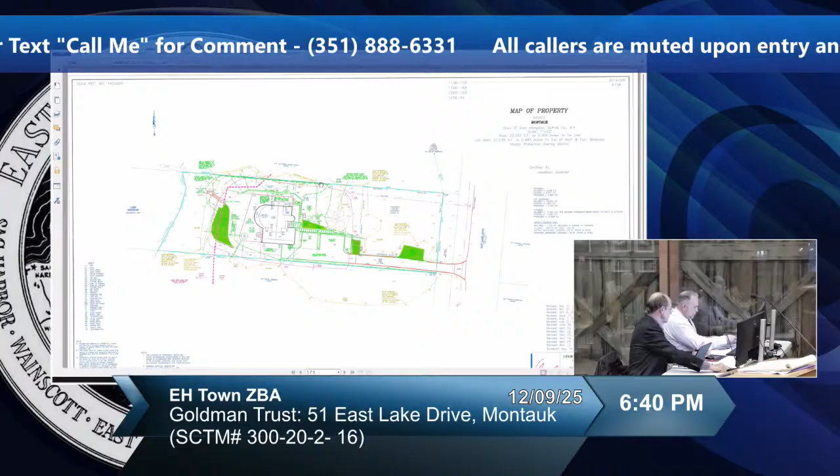Before I get started, I'd like to point out one significant change made by the applicant. The 309 square foot deck addition on the Lake Montauk side of the house has been eliminated. That eliminates the need for a 26.6 foot bluff crest setback variance, as well as the 68.7 foot wetland setback variance. So, in consultation with the client, after reviewing the analysis memorandum, that has been eliminated from the application, significantly reducing the relief being requested.

Yesterday, Due East also submitted a drawing that compares the layouts of the existing driveway with the proposed driveway and the driveway that was approved in 2016. I believe you have that available—this way there's no confusion on what was and wasn't approved. It's a nice visual, makes it a little easier.

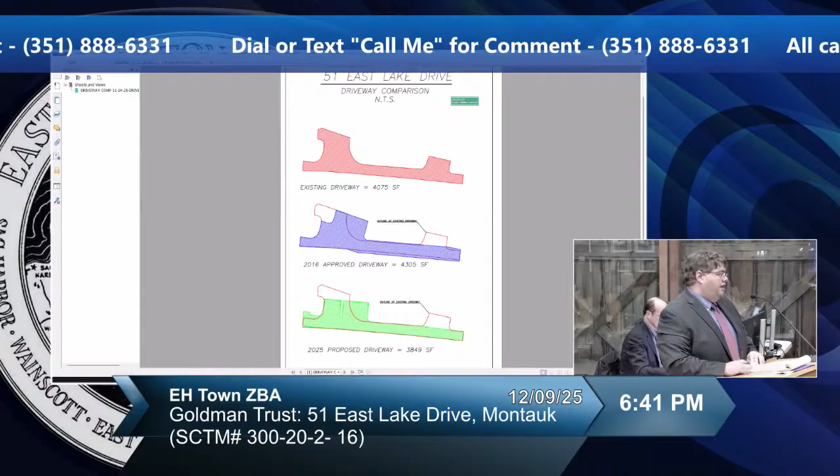Also, a drainage plan was submitted yesterday by Due East, which provides dry wells that will capture the runoff from the shed, the carport, and the existing driveway. So it eliminates any runoff concerns for these proposed structures and the proposed reconfiguration of the driveway.

The property is bounded by Lake Montauk to the west, East Lake Drive to the east. The eastern portion, as you saw, contains significant freshwater wetlands that run along the northern property line. In addition, a small wetland had developed over the leaching pools from when that was upgraded in 2016.

First, we'll address the bamboo. We recently reevaluated the square footage, and it's closer to 3,000 square feet than 2,000 square feet of the stand of bamboo. This is going to be removed and revegetated in that area along the property line.

To be clear, this bamboo removal is only on our property. I know there was mention in the TAM that the neighboring parcel was also looking, but this is only for our property. Access for the bamboo will be taken along the south and west sides of the house in the area of the existing lawn on the Lake Montauk side, so there wouldn't be any disturbance for the equipment to get around there to remove that bamboo.

The existing bamboo does not support native habitat and does not provide any environmental benefit. With me tonight is Dr. William Bowman of Land Use, who can address the benefits from the bamboo removal and answer any questions that you may have in that regard.

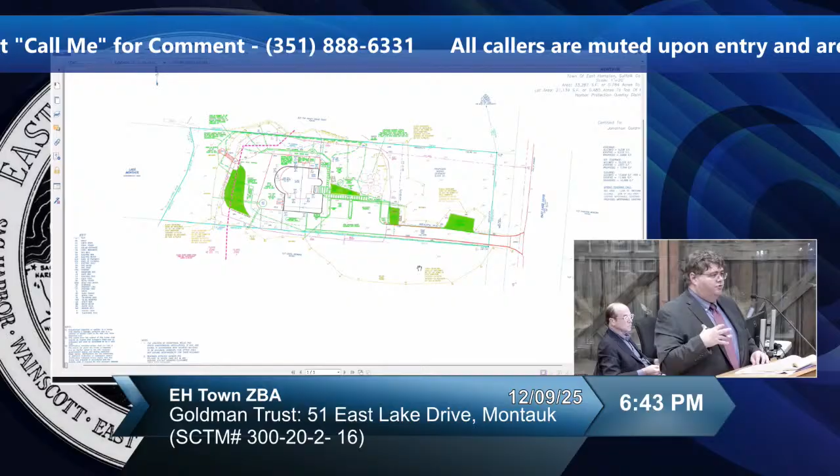Good evening, ladies and gentlemen of the board. William Bowman, Principal, Land Use Ecological Services. Can I swear you in? Sure. You swear to tell the truth, the whole truth, and nothing but the truth? Yes, sir.

Land Use Ecological Services, 570 Expressway Drive South, Medford, New York. As David indicated, the application will involve managing about 3,000 square feet of bamboo along the northern property line.

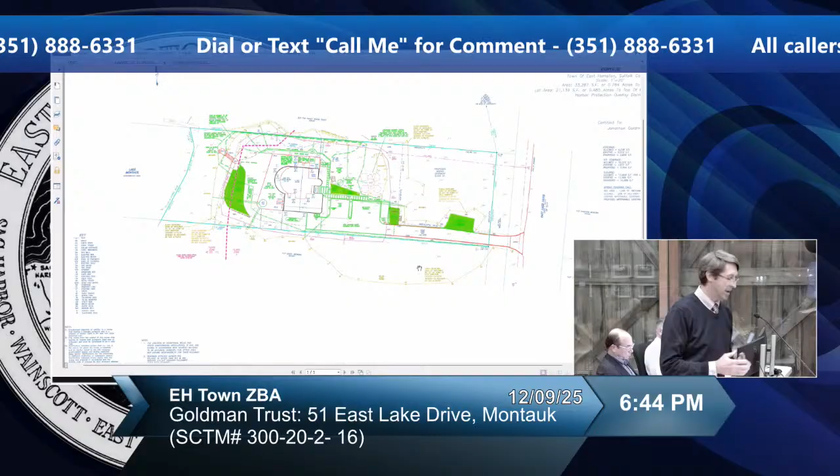This bamboo management will provide ecological benefits by establishing native vegetation that will provide better wildlife habitat and food resources, and converting that rather out of place bamboo stand to a habitat more typical of the dense shrublands found in Montauk. Bamboo management can be a chore, but the upside of switching that 3,000 square feet to native vegetation is well worth it.

Bamboo grows remarkably fast, forms those dense stands and a really dense root network that outcompetes and excludes native vegetation. The successful management of bamboo at this site will require removal of that extensive rhizome mass, and then follow-up maintenance for several years to control any new bamboo shoots.

The first step in that bamboo management would be cutting all the shoots to ground level with a motorized pruning saw or hand tools. The rhizome network would then need to be excavated out to a depth of about 24 inches and replaced with clean sandy soils.

To be consistent with the surrounding wetlands and overall project site, the restoration area will be graded so that the post-project elevations don't exceed the existing, and that the site provides a gradual slope from east to west to allow drainage towards Lake Montauk.

As David noted, the existing bamboo stand does cross the property boundaries and is present both on the property to the north and the subject property. Accordingly, given that the bamboo is not being controlled on the property to the north, a root barrier about 150 feet in length will need to be installed on or close to that northern property boundary to minimize potential for the bamboo rhizomes from the neighboring property running onto this restored site.

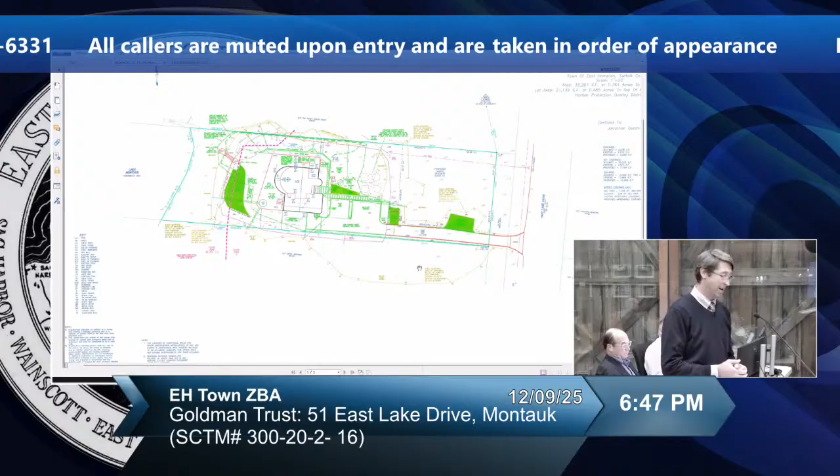Then, subsequent to that maintenance through that first spring shoot growth period, native plantings would be installed in that 3,000 square feet. A plant schedule was originally submitted with this application, but we'd expect it to be changed.

We would want the native plants to be installed to emphasize native shrubs. As I said, the bamboo area would then be replanted in mid-May to early June.

Of course, all the sediments and rhizomes that are removed would have to be taken off site. As David mentioned, they'd be loaded around the front of the house, brought to the existing driveway, dumped directly into a roll-off container, and then transported to a licensed disposal facility. There would be no temporary stockpiling of the material on any soil surfaces, and certainly no reuse of the materials on site or off site.

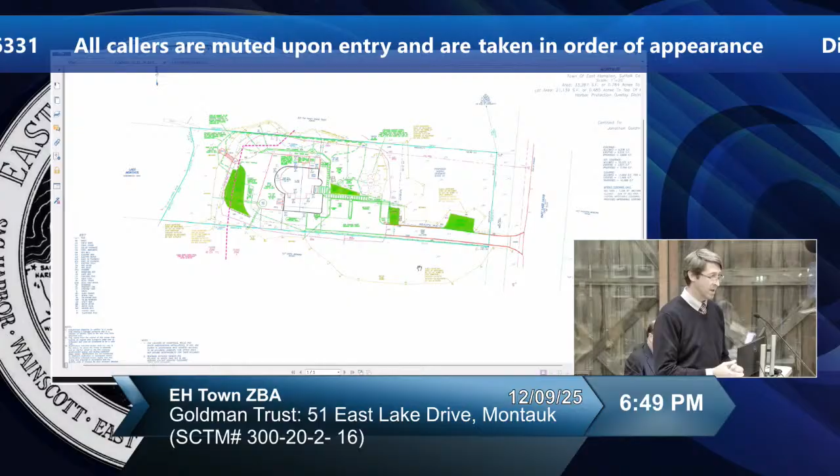Due to the excavation, the work area—the restoration area—would be surrounded by a heavy-duty silt fence. That's a silt fence with the kind of heavy wire mesh backing to prevent any erosion and transport of sediments towards Lake Montauk.

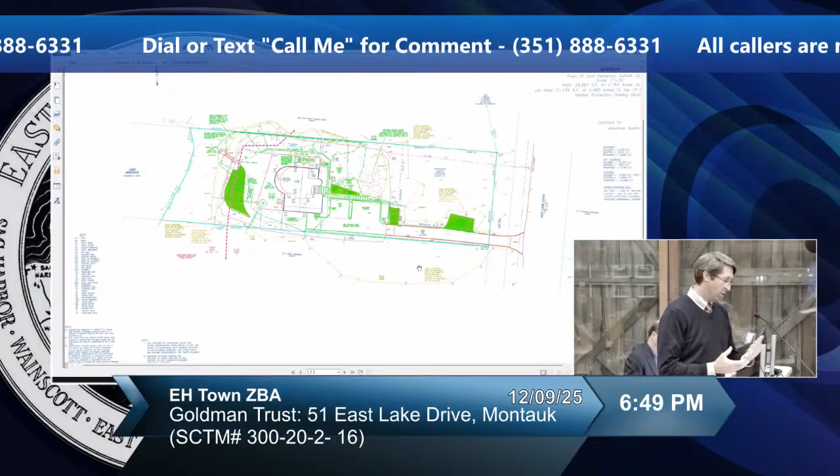Due to the aggressive nature and persistence of bamboo, long-term maintenance of the site would be expected for several years. In the protocol, we anticipated that would be necessary to ensure successful eradication and establishment of native vegetation. That maintenance would involve maintaining the restoration area twice a week during the spring growing period to look for new shoots and remove them if seen.

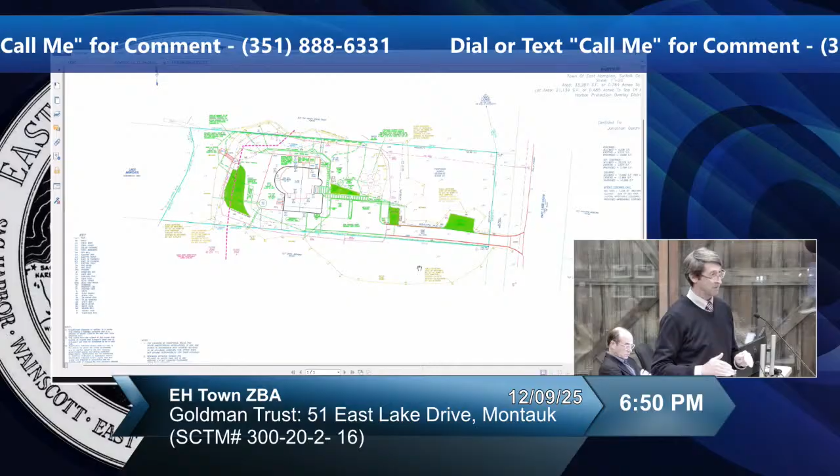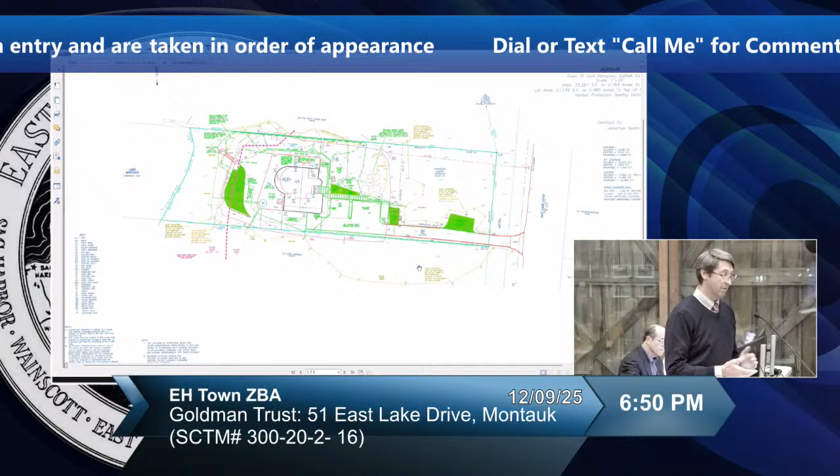Also inspecting and maintaining the root barrier. Rhizomes from the neighboring site to the north could try to grow over top of the root barrier, and you'd have to cut them off at that point. With successful maintenance, 3,000 square feet of additional native vegetation could be established. That vegetation is adjacent to the wetlands and the bluff, and would provide significant habitat improvement.

So with that, if the board has any specific questions about the removal methodology for the bamboo. I don't have any questions. Thank you.

As part of this project, our client is also proposing a septic system upgrade. The existing septic tank would be removed and replaced with an IA system, an IA tank. The pump station, which my understanding is failing or failed, will also be replaced. The leaching pools will not be replaced - they are existing, and we don't need to disturb or remove them in order to install the tank or pump system. So that little wetland that has formed over that will not need to be disturbed. Those leaching pools will not be removed.

Moving next to the cabana on the north side of the house, where there's currently a shower, bathroom, and storage area, that structure will be rebuilt in kind, in place. The exterior dimensions will not change. The interior layout will be modified slightly so there'll be a little more storage, and the shower will be moved to the outside eastern wall of the structure - an open air shower instead of being enclosed inside. So there'll be no footprint change, no additional square footage or floor area, decking or anything like that. It's in-place reconstruction.

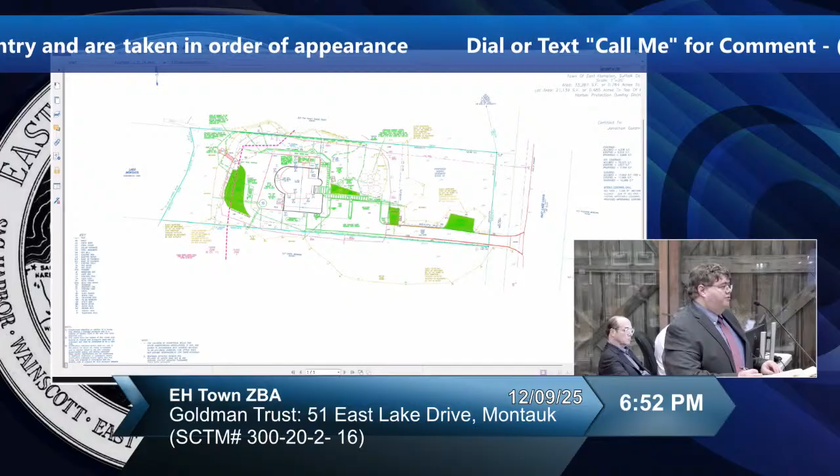In addition to the bamboo removal and revegetation, as further mitigation our client is proposing a scenic easement over the eastern 100 feet of the property, absent the driveway. So there would be an 8,440 square foot scenic easement proposed over the eastern portion of the property.

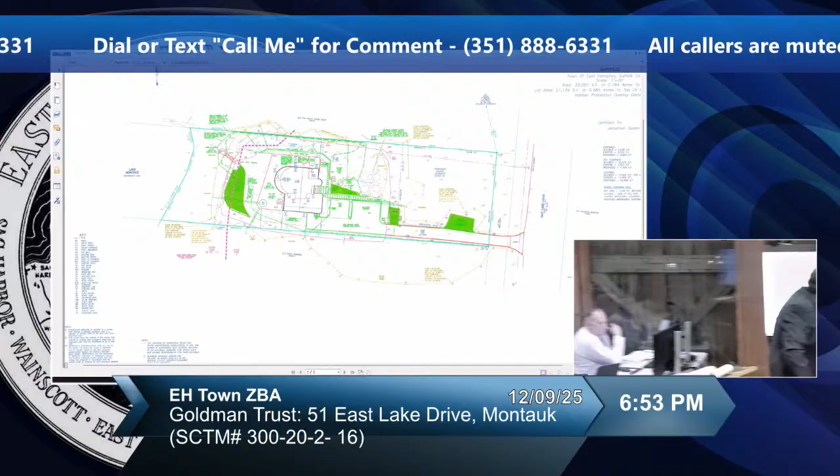To effectuate that, the parking area noted on the right-hand side as you first walk in is going to be relocated up closer to the house. It's currently approximately 2 feet from the wetlands. It will now be approximately 6.5 feet from the wetlands, 20 feet from the new pocket wetlands, and 25 feet from the larger eastern wetland. This provides additional continuity for the scenic easement and for the wetlands and native vegetation. This area will all be removed so the scenic easement covers that whole square, and this area will be replanted with native vegetation contiguous to the wetlands.

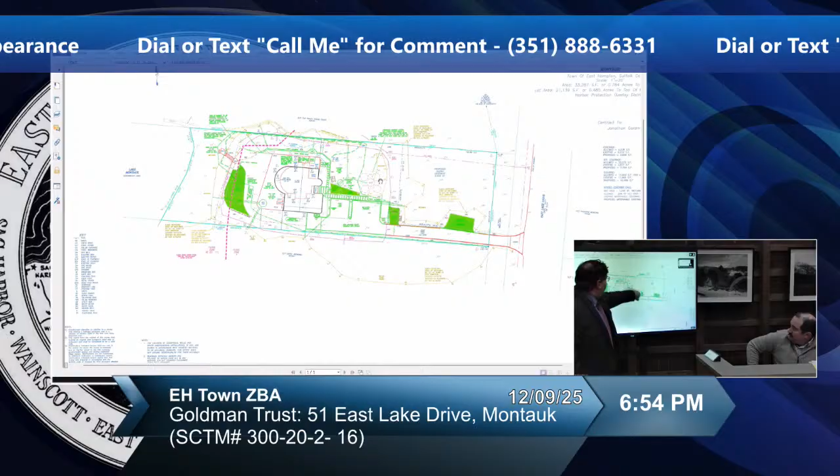Where's the pocket wetland on there? It's right here, out here. Yeah, it formed over top of the leaching pools from when they were installed a few years ago, I believe 2020, in that area.

So we have that chart that shows the three driveway configurations. If we could pull that up, we'd appreciate it. Thank you. The current proposal reduces the driveway by 226 square feet when compared to what was approved in 2016, that driveway was 456 square feet larger than what we're proposing now. So we're less than what's there and less than what was previously approved in 2016.

We understand that small wetland was not present at the time of the 2016 approval. However, at that time the board approved coverage of 7,891 square feet, building coverage of 2,312 square feet, and clearing of 15,498 square feet.

As part of the current application, the proposal includes 127 square feet less in total coverage and 4,960 square feet less clearing, in addition to providing a substantial scenic easement that was not part of the 2016 approval. Through revegetation of multiple areas on the property, overall clearing will be reduced by 676 square feet.

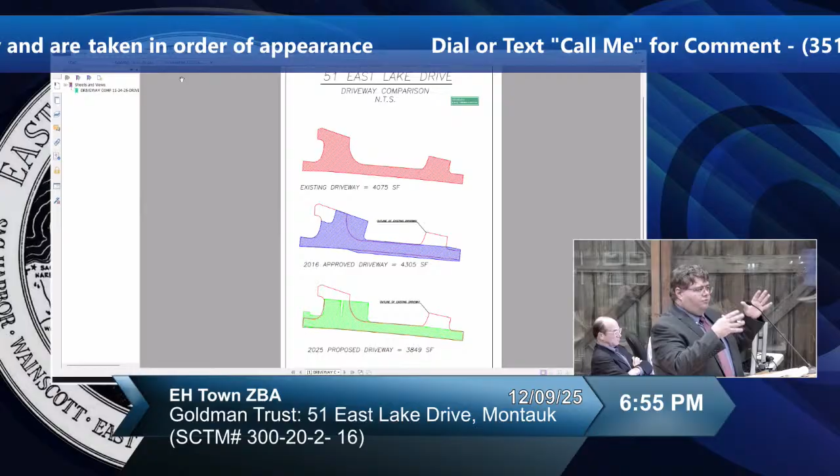In addition to the parking area being revegetated, the area where the pop-up shed and carport were will be revegetated. Approximately 800 square feet along the top of the bluff will also be revegetated from lawn to native vegetation. There will be significant revegetation at the property, in addition to the 3,000 square feet where bamboo will be removed and revegetated. We feel this benefit to the property, the environment, and the neighboring wetlands is a significant mitigation for the request we're making today.

Can you clarify the total lot coverage? You're saying it's decreasing? Because the survey is saying it's increasing.

Which survey are you looking at, Ron? Total lot coverage, am I looking at the right survey? I believe this is just showing it decreasing slightly. Oh, maybe, okay, so maybe I'll pull that up. I might be looking at the wrong one, David, so let me pull that up. All right, thank you. Which one? October 31, 10/31/25. Okay, yes.

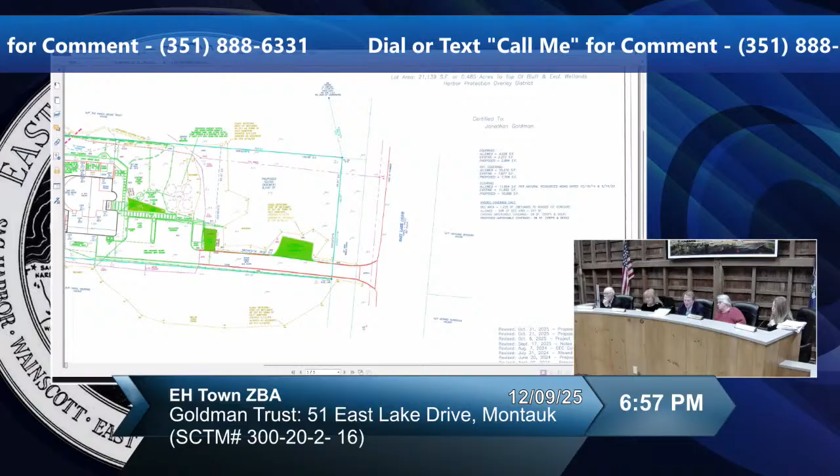The building coverage is increasing, total coverage is decreasing, and clearing is decreasing. But that doesn't include the 300 some-odd square feet of deck being removed from the application, right? So that's not reflected.

No, this application does not include that deck. There's no deck on this survey. So that's already been removed from that number. That decision was made since the analysis memorandum came out and the application was resubmitted.

Is there any other questions at the moment? Are you finished? No. Oh, good. No, I'll wait till you're done. Sorry. That's quite all right.

As we just mentioned, the carport and shed increase the building coverage by 672 square feet from what's existing, and 572 square feet from what was approved in 2016. However, any runoff from these structures will be captured by dry wells located in the driveway and adjacent to it, outside of the scenic easement, so no detriment will come from runoff.

The carport is open on 3 sides and will be built over the existing pervious driveway. There will be a new, I believe quartz, but still pervious driveway underneath it. It's mounted on sonotubes, so there's no foundation under it per se — it's essentially just being built over the pervious driveway.

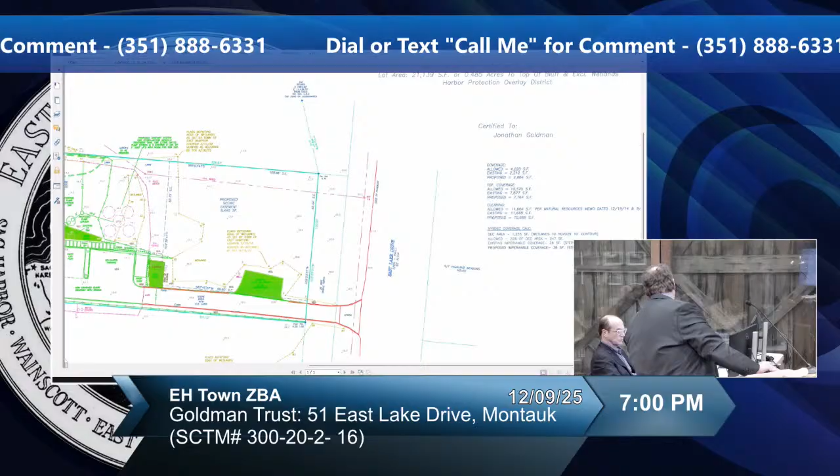This is the shed right here. Typically it would only go down 3 feet. The plans submitted do show it on footings, but we can do that on sonotubes as well to minimize the disturbance. I think that would be more appropriate.

That way we could eliminate the need for disturbance from any footings. We'd be happy to make that change and submit drawings as necessary. What's the total capacity of the dry wells you're talking about?

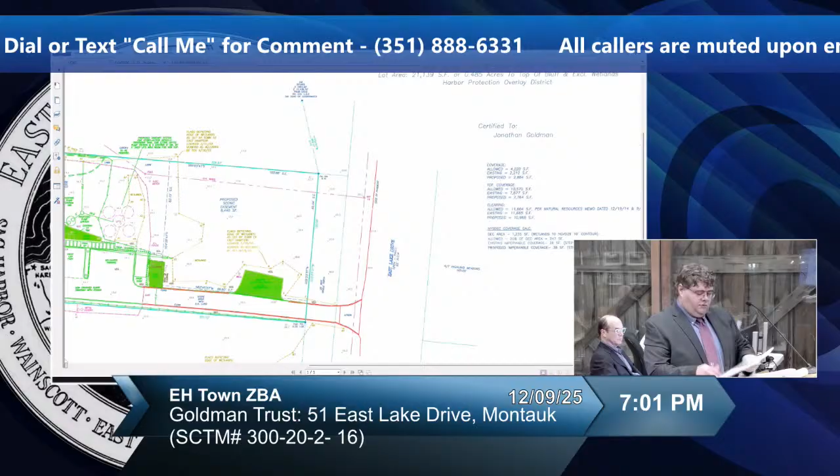Sure, David, I believe they have it already. It's a 2-inch rainfall event. This is the engineer's design. Thank you, yes, it says it's a 2-inch rainfall event. Thanks, Shannon, I'll look up this.

I got it, right here. There's six dry wells, and each one has a 42.24 cubic foot capacity. The engineer's not here with us this evening, but that was designed to capture not only the runoff from the carport and the shed, but the entire length of the driveway and the parking area by the house. So if you can see in that picture, I believe there are 4 drains down the northern side of the driveway as it comes in, and they're all linked together into these 6 dry wells.

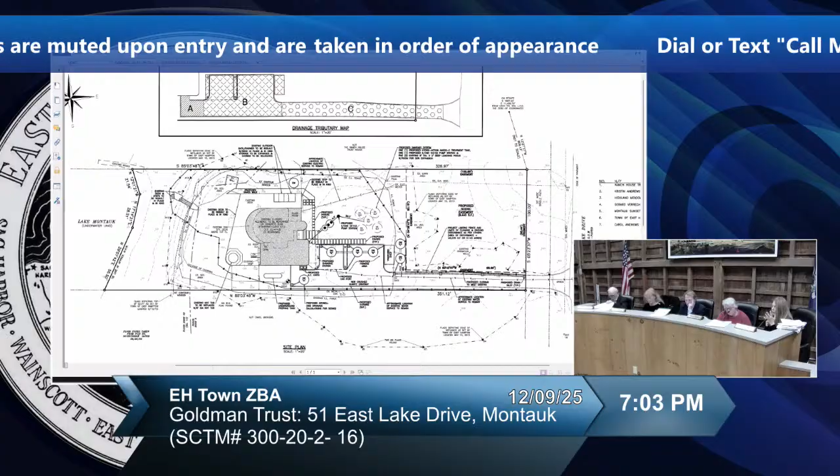So it's a small structure, but I think I'm looking at the right site on the survey—given that it is a small structure, was there another way to optimize the position between its utility and getting it further from the wetlands? Well, part of the issue is the driveway's 150 feet long to the parking area, so we do need area there to turn around as well as have a car or two parked at that time. So that's why the shed is brought right up to the side of that parking area. Anywhere north of that, you have the additional wetland and the sanitary system. So that really provides, we felt, the maximum convenience and utility for our client, while also not putting it any closer to the wetland. Unfortunately, there's wetlands north, south, east, and west.

I'm sure that you stared at it all very closely. Any other questions here? No, I'm almost done.

So I'll just run through a quick little summary here then. So the benefit we're providing here as part of this application: decreasing the total coverage by 113 square feet, proposing an 8,400 square foot scenic easement, relocating the parking area that's 2 feet from the wetlands and revegetating that area to provide continuity for the native vegetation and wetlands, revegetation along the bluff crest, removing and revegetating the 3,000 square feet of bamboo, decreasing the overall clearing on the property by 676 square feet, and adding an upgrade to the septic system to an IA system, as well as providing dry wells for these proposed structures and for the driveway.

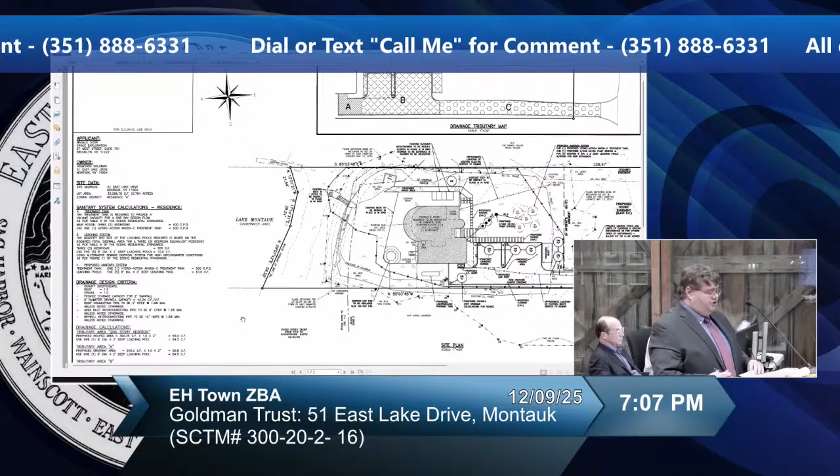The lot's constrained, that was noted in the 2016 approval as well. The proximity to the wetlands on and adjacent to the property—there's no way to avoid variances for any sort of structure on this property. The carport is over a pervious driveway already, an area that's been previously disturbed. The shed, as you asked, could easily be on sonotubes to reduce any sort of disturbance, and so is the carport on sonotubes. So it's a minimal disturbance, and any sort of runoff from these structures is captured by the dry wells.

We understand that variances can be considered self-created, but such self-creation is not dispositive. I think we've shown that these variances are minimum necessary to alleviate the difficulty for our client without impacting the surrounding wetlands. Again, there's no garage, there's no basement for storage. So we recognize the property is constrained, and I believe this application has done its best to fit the requirements of our client while also providing a net benefit to the wetlands in the neighborhood.

So I'm done if you have any questions for me. Questions? I have a couple. We'll hear from Brian as well, but I am curious, and I don't have the expertise on this, so that's why I'm asking.

So you've got an emerging wetland, or a newly sourced wetland, that is partially over leaching fields, and those will remain. I understand not wanting to disturb the new wetland, but can you address the impact? We'll hear from Brian, I'm sure, but I wanted to get your take on leaving leaching fields under wetlands. I don't know if that creates any potential issue. I'm not a scientist, I'm not sure.

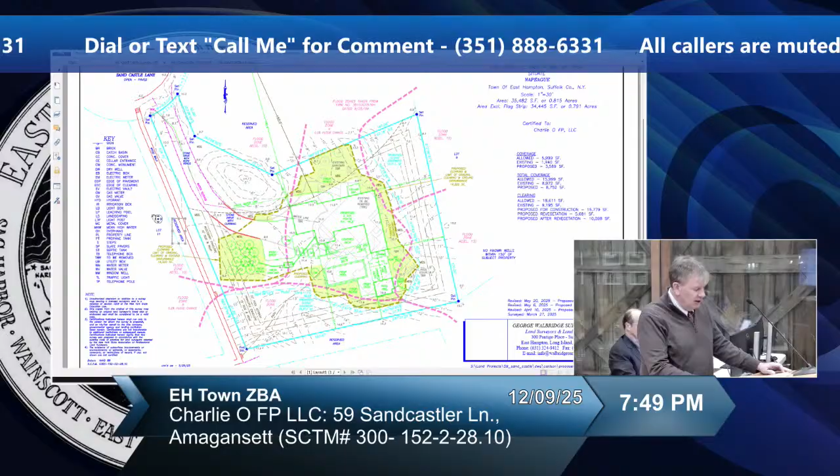They're the owners of the property at 59 Sandcastle Lane. We're seeking permits to redevelop the property with a new residence, pool house, decking, and other improvements depicted on the proposed plan and notice in tonight's hearing. I'm also here with Britton Bistrian and Sean Webb, the architect.

Just if you have questions I don't have—I can't complain about the prior hearing. I should never complain about people talking long at zoning board hearings, so I'm going to keep that in mind. We've been here a while, so I'm going to try and be quick and address a few points.

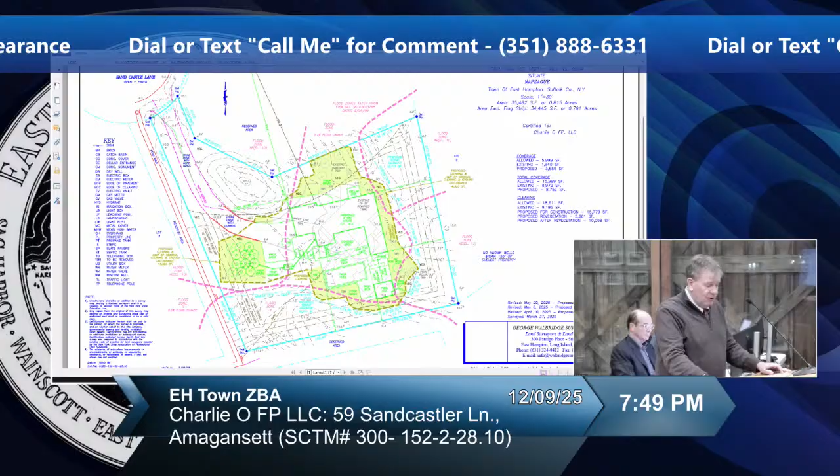The lot, as Member Meering pointed out, is part of the Dunes at Napeague subdivision, approved by the town in 1981. Most of these lots are similar in size, about an acre. I think it was a clustered subdivision, so some lots are smaller to allow for larger reserved areas. This house was built right after the subdivision was approved, probably around 1982.

It's a little different than some of the areas to the west in Beach Hampton, where you have these small non-conforming lots—a totally different area, basically. It just has its own character. You'll see the larger houses protruding out of the dune land, et cetera.

I wanted to recognize the only relief requested here is an NRSP associated with the beach vegetation. All of our proposed improvements meet wetland setbacks and all other zoning requirements and are proposed out of jurisdiction. I think Member Meering's photos show we really value the dunescape on this property. It's a really unique area—something you don't see anywhere else in the town. It's a lovely landscape, and we made great efforts to preserve and protect it with our planning.

The existing house predates the town's NRSP regulations, probably from 1982, and these regulations were adopted by the town right around 1984. As I recall, this might even have been one of the subdivisions that led the town to regulate dune vegetation at the time.

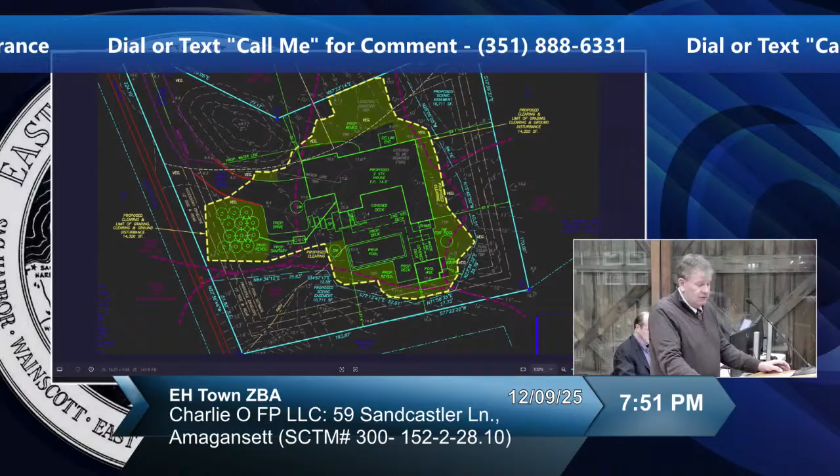My client did have the opportunity to seek to grandfather this application under the prior gross floor area limitations. We did have an active application at that time, but we really didn't have the interest in maximizing gross floor area on this residence. We thought the proposed design was consistent with the natural aspect, and we didn't want to overpower it with the structure. We made great efforts to fit all of our proposed redevelopment within the limits of clearing and disturbance of the existing house in accordance with the NRSP regulations.

And this is the graphic that Member Meering was referencing—just a colorized version where you can see the outline in red is the existing improvements, with that funky arc deck that'll make it stand out. The overlay in blue is what we're proposing to put over it, so it largely follows the existing footprint as much as we could.

Current sanitary design to code using an I/A system is a variable outside of our control. The sanitary system will expand in size as well as the area it occupies based on the shallow groundwater system we're using. We're proposing to revegetate all areas disturbed by construction using beach vegetation.

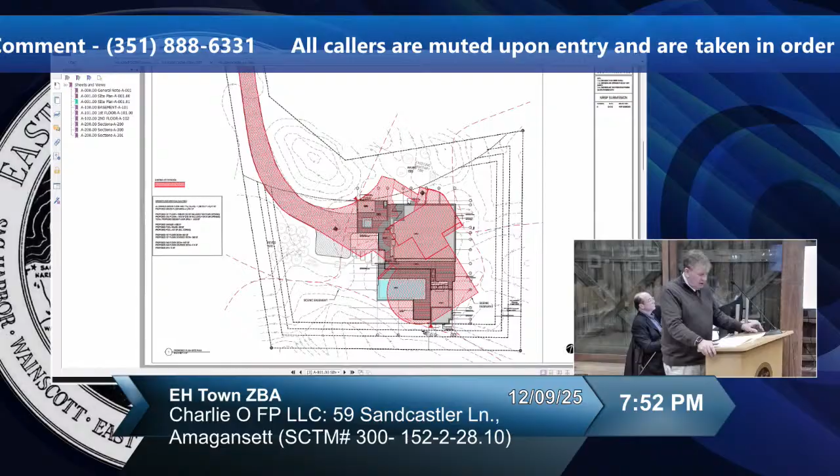I would agree to all the suggested mitigation the planning department has suggested, including the expansion of the scenic easement to the north and northeast of the existing driveway. That's certainly a lovely area that should be protected as part of the entrance to the property, and it's also visible from the areas off of the road frontage.

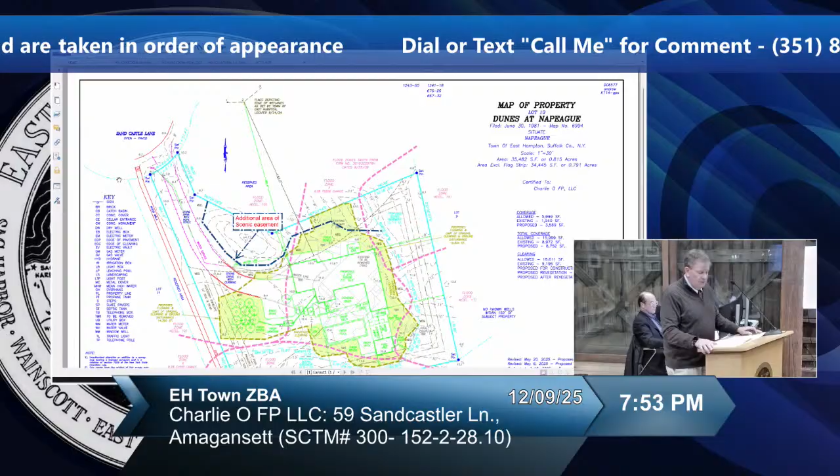I did want to discuss the sanitary system. Abandoning it in place is a very beneficial suggestion. Basically, the existing sanitary would be pumped out, cleaned out, and filled with clean sand and left to remain on site. Actual removal of the system, the rings, et cetera, would bring a lot of additional disturbance to the site. It's worth noting the existing system is located within the minimum required wetland setback, whereas the new sanitary system was proposed on the west side of the residence.

It's also proposed in a relatively flat area. You don't see the undulations in the topography there, and it was done to maximize its setback from the wetland. It complies with all setbacks. It's also a logical location adjacent to the building envelope that will not require further clearing outside of what we intend to be a closely followed edge of disturbance. It will also be an area that's easily serviceable if they have to come maintain the system, pump it out, et cetera. It's right next to the driveway.

I should also mention that the New York State DEC issued a letter of non-jurisdiction on the project. I have it here with me, but I think it's also in your files, and I can submit it if you need it. Other than that, I'm available to answer any questions you might have.

What's happening with the disturbed or excavated soils? The disturbed or excavated soils are largely clean sand, basically. What's happening during construction, what's the protocol? Because typically, this is delicate dunes—are we maintaining the soils on site for reuse? Where are you going to store them?

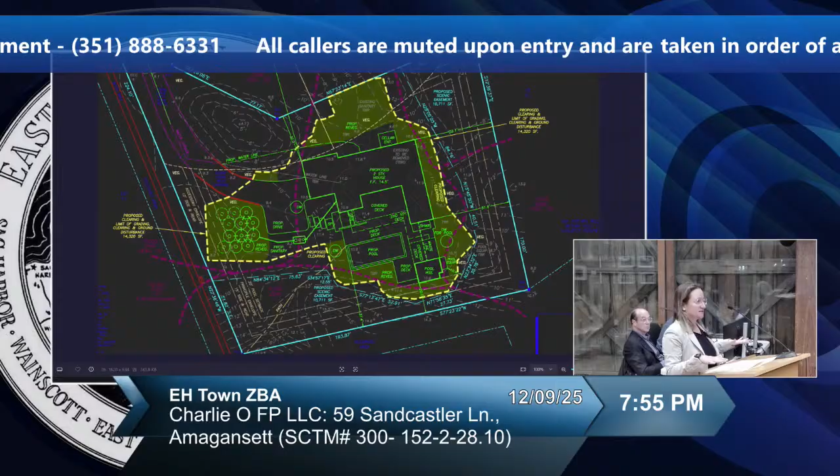In preliminary discussions with the contractor, we had discussed that because we are removing a house and a foundation, there will be areas that need to be filled in. As well, because the existing septic system is pretty extensive, reusing that sand on site—pumping and abandoning the septic—a lot of that sand can be used there. But the intent would be to keep it all on site.

We'd be happy to, as a condition of approval, do a cut and fill or construction protocol. So there are two concerns when dealing with properties like this: what happens to the soils and reuse of the existing soil so vegetation can grow back and be maintained, and also maintenance of the duneland character of the property when completed. We want to see those rolling topographies maintained, which I think you're doing.

So those are two major concerns we always have when doing such a pristine location like this, because it's one of the most pristine in the town. And it's definitely beneficial to the applicant and to the project as a whole to keep those soils on site.

Sand is expensive, I can speak from experience on that one. To use the soil that we have to backfill the new foundation, the new foundation is a little bit larger.

I think that would be good practice to do that. So however we want to memorialize that in any approval, we'd be happy with it, either as a construction protocol or all soils need to be stockpiled on site in a certain location. Maybe we could identify where that is. Probably make the most sense over the septic and do that last. But we'd be happy, I'm sure there's some logistical...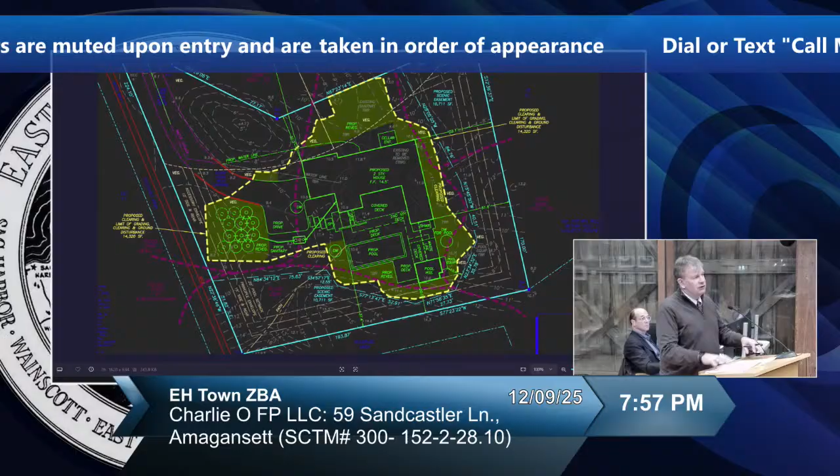Well, I believe what you're talking about are the top layers. Traditionally on projects like this, I've seen conditions that say excavated soils will be retained on site in a sediment controlled area for reuse on the site. And clearly we would use the top layers to create the undulating topography, and the lower levels would be more applicable for backfilling.

But I don't think we would object to stockpiling, maintaining them on site in a sediment controlled area. And if we do have to remove any of the soils at the conclusion of construction, we would come back to the board and explain that for the board's approval. But I don't think we're going to need to.

Looking at the cut and fill, just the aspect of the site, it's all clean sand, and our intention wasn't to. Yeah, and staging becomes an issue too, but maybe with what Britton says, you stage the septic at a later point or whatever. Yeah, the septic area, staging and sequencing is an issue.

So the TAM does question the scope of the 6,584 square feet of temporary clearing. And, you know, we've gone through this on other applications too. So can you address, I mean, do you have a 64% increase in GFA, the lot coverage, not total, but the lot coverage is, you know, going up, I think, 1,500 square feet.

It seemed, I guess, just address why 6,584 square feet of temporary clearing is obviously needed. Is there a way to, you know, take that down?

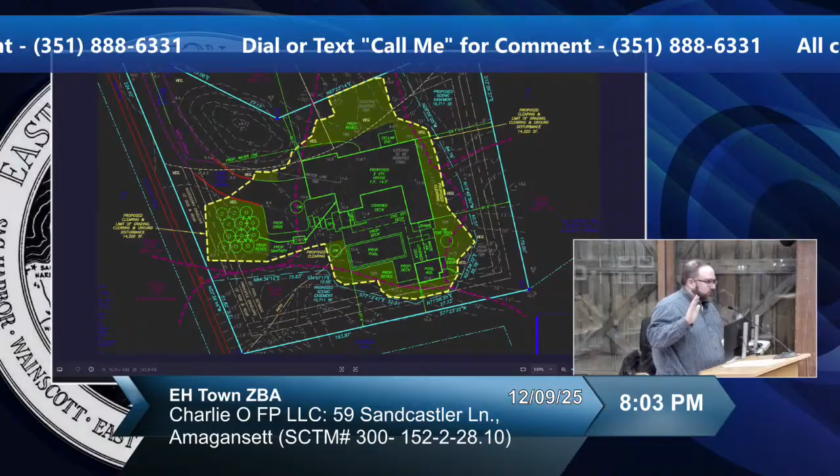I do. Thank you. So this parcel is located in the southern end of Sandcastle Lane in Amagansett. The project before the board is to demolish the existing residence, associated structures, and construct a new 3,910 square foot two-story residence with a 600 square foot attached garage, decking, porches, swimming pool, pool house, outdoor shower, and associated structures. The project requires a natural resources special permit for the clearing of beach vegetation, construction within dune land area, and minimal work within jurisdiction of freshwater wetlands to the north.

The dune land habitat in this area of Amagansett consists of maritime dune land and maritime heathland habitats as defined by the New York State Natural Heritage Program. The maritime heathland habitat is ranked by the Heritage Program as one of the least common in the state and has become less common throughout Long Island and the Mid-Atlantic region. This area is one of the few remaining areas of town that contains high-quality, pristine duneland vegetation.

The premises are improved with an existing residence, which is surrounded by pristine rolling duneland. The depressional wetland exists near the road right-of-way to the north of the property. A scenic easement is proposed in order to cover the majority of the significant duneland topography on the parcel as mitigation. This parcel has town-protected beach vegetation such as reindeer lichen, and state-protected pine barren sandwort, bearberry, and beach heather.

With such valuable existing vegetation across the undisturbed area of the parcel, the preservation of those areas should be paramount in any application on the property. The best way to maintain duneland characteristics and vegetation on parcels is to limit their clearing and disturbance from the beginning, rather than trying to reestablish it after construction is completed.

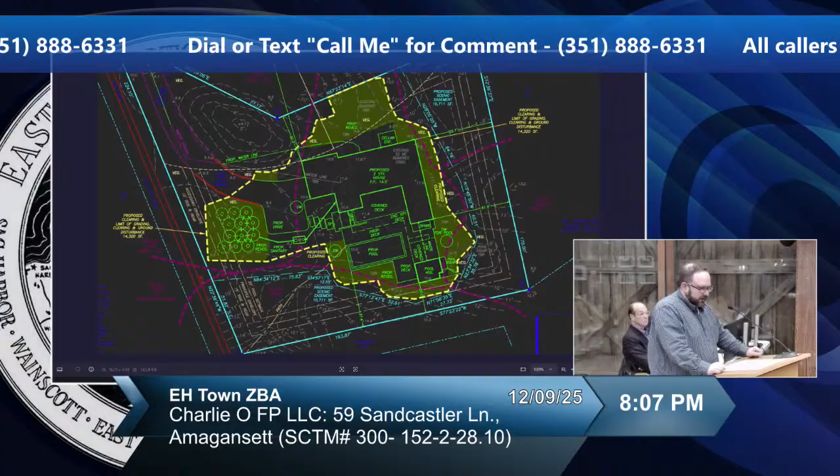Additionally, applicants are proposing to revegetate approximately 5,681 square feet of clearing for construction, including over the proposed sanitary system. An existing sanitary system should be removed, although that may not be required any longer. They discussed beach grass - I think that'd probably be fine in this case. I don't think anything more substantial is required. In this area, there's not a lot of woody vegetation other than like bearberry and things like that, but I don't think we normally would see that in a revegetation plan.

So I think at least kick-starting the vegetation in the area with beach grass and then letting the other vegetation sort of seed itself over time is probably a realistic option in this case, especially reutilizing those sandy soils, which have that seed bank in them, is important in that.

Aside from including more of the sensitive areas of the dune land in scenic easements, the proposed mitigation is in keeping with similar development in this area. While the proposed project is in the same approximate area of the parcel as the existing development, the quality of the surrounding dune land and vegetation cannot be understated. The board should be sure that the proposed improvements are appropriate and the project is designed in order to minimize unnecessary disturbance. Other than that, I can answer any questions that you might have.

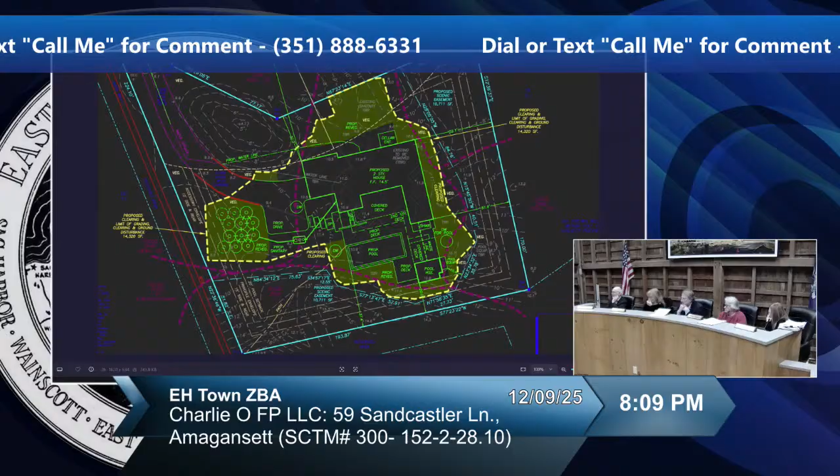Obviously, you understand what concerns we have, but in this diagram here, you have the yellow dotted line, I assume, is the clearing limits during construction, which I assume would be where the project limiting fence would be set. What about the driveway? I'm concerned about the dune feature to the east of the driveway, and I think we need to make sure construction limiting fence travels along that, because the biggest problem, as you know, is you can have construction creep on a project, and I want to limit construction creep. Certainly, that shouldn't be difficult to include in a new sketch or to include it in the determination.

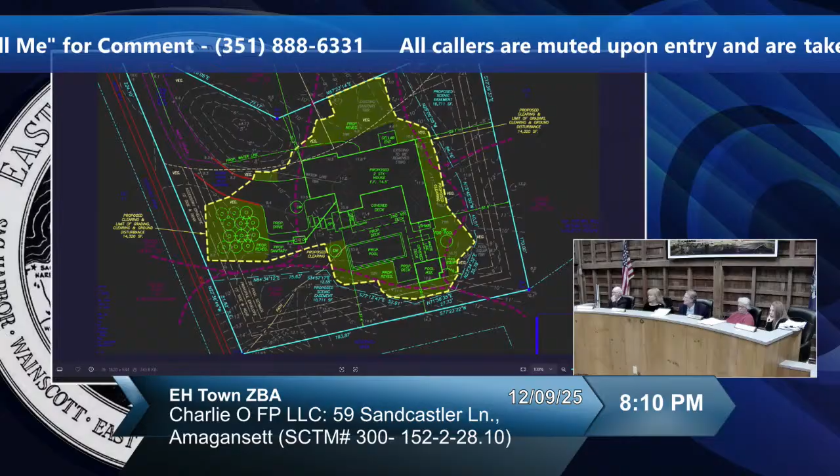Thank you. So number one, what is the square footage of the lot that will be covered by the scenic easement? I have no idea. It might say it. Did it say it? I didn't see the square footage. Is it that proposed 10,711 that they're noting on the survey? Yeah, plus an additional, I don't know, maybe 4,000 for the one that we had suggested. So maybe around 14,000, 15,000, something like that. The 4,000 is in addition to what's on the survey proposed. Right.

At 10,000? If what we had suggested was included on top of what they had come in with, you're saying there should be a somewhat bigger scenic easement. Correct. Let me bring up my sketch. And then why, if it's not in AE 10, is the elevation being raised as if it's in AE 10?

I think that's just the nature of the construction. If you look at the existing contours, they're at that elevation already. They're not raising it significantly, they're just building to match the existing contours.

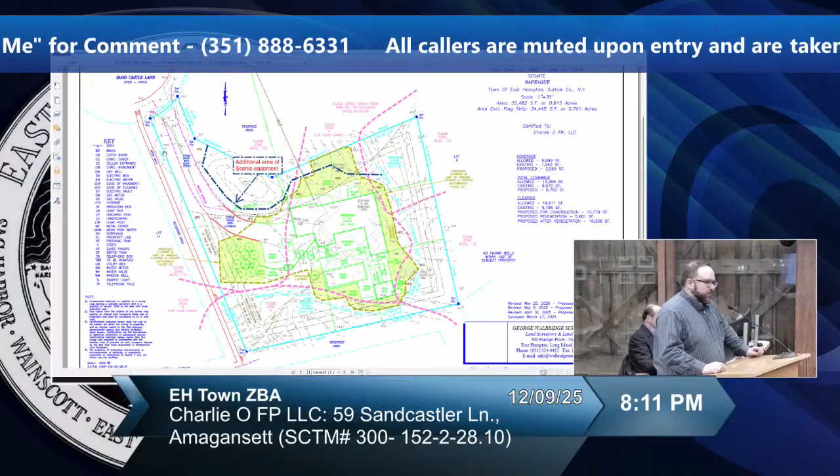In your paragraph about mitigation, you say as mitigation, extend the scenic easement, but then you talk about the re-veg of 5,681 square feet in the same breath as mitigation, but it's not mitigation because they're doing 6,584 square feet of temporary clearing, which would be expected. They're not asking to keep that clearing, they're asking to temporarily do it and then mitigate it by revegetating afterward.

Any other questions? I'm good, thank you. Thank you, Tyler. Is there anybody in the public that would like to address this application? Anybody online? You have zero callers. Thank you, Andy.

So I want to point out, one is the scenic easement. Yes, I think we can extend it up. That'll put it at about 15,000 square feet. That's, I don't know, 40% of the lot, but it's really quality versus quantity in some respects. The quality is the most important, the duneland aspects that you see and value the most are the ones we're really trying to protect.

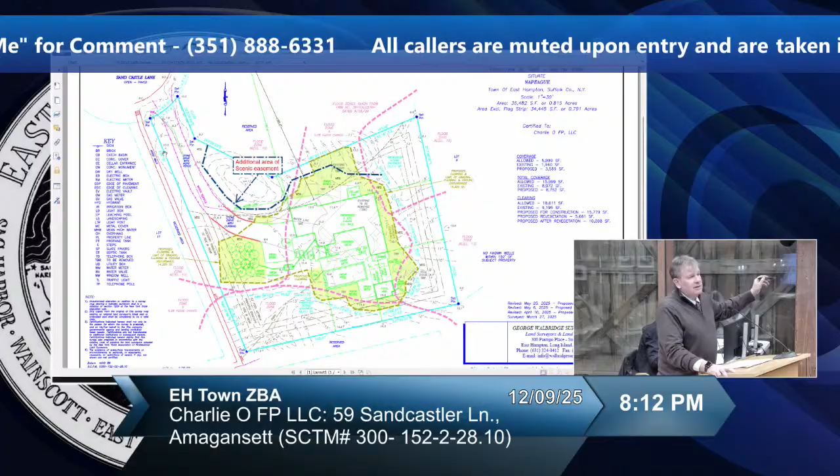In terms of the sanitary system, I think that temporary clearing will be reduced. We have to excavate enough to get the covers off to pump it out per health department regs, but that's certainly going to be much less temporary clearing. I don't know that we actually factored in what that difference would be, but it's probably 1,000 square feet, give or take, looking at the area we're talking about.

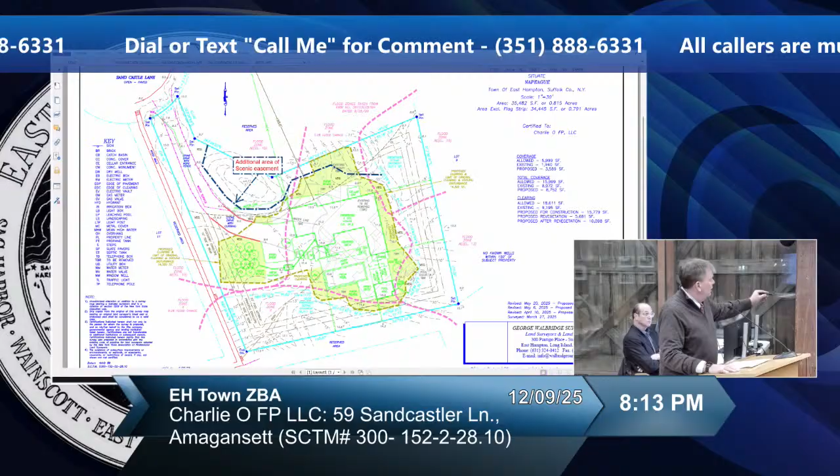In terms of the materials on site, we'd be happy to accept a condition that all material excavated shall be retained on site in a sediment-controlled barrier area. I think the area of the proposed sanitary system would be an ideal location to stockpile those materials while we're working. We can stage them there and work around them. There is a large area on site, it's not like we're super constrained in terms of where we can put these things.

Any other questions? I have none.

Andy, I just want to take a moment and say that you've been in front of me many times, and I want to take this opportunity to say I've enjoyed every one of them. Thank you, Your Honor. I've learned a lot from you. I've learned you're really good at naming wetlands. I've learned also that you're like George Washington, everybody in Montauk can say Andy slept here, Andy Hammer slept here. Thank you. Well, thank you very much for your service, it's been a pleasure.

Best of luck. So are we leaving the record open for anything? Are we getting a construction protocol? I think we can condition that. Number one, I'm concerned about the construction limiting fence, that's going to be dealt with I'm sure, and then maybe we can condition it on soils.

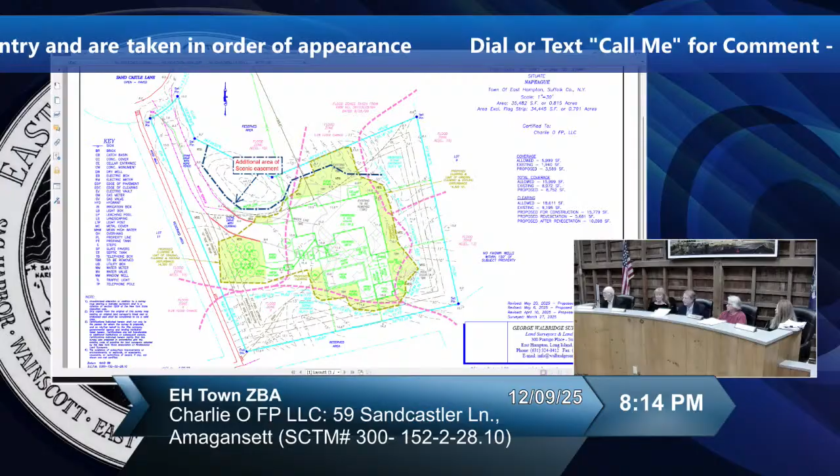I think that's the only open item, the soils remaining on site. I think we can do that in a sediment-controlled environment, the staging area. Yeah, and ultimately, not to leave the record open, but a condition of approval for a survey with the expanded clearing and the expanded easement. I think the planning department generally would do that on the sketch they submit.

So we're not leaving anything open, Mr. Chair? I don't think we need to. I don't think we need to either, I think we can condition it.

Thank you. Okay, thank you very much. Thank you, Britton. You ready for a motion? Yes.

Okay. In the matter of Charlie OFP LLC, 59 Sandcastle Lane, Amagansett, tax map 300-152-02-28.10, I make a motion to close the hearing and the public record.

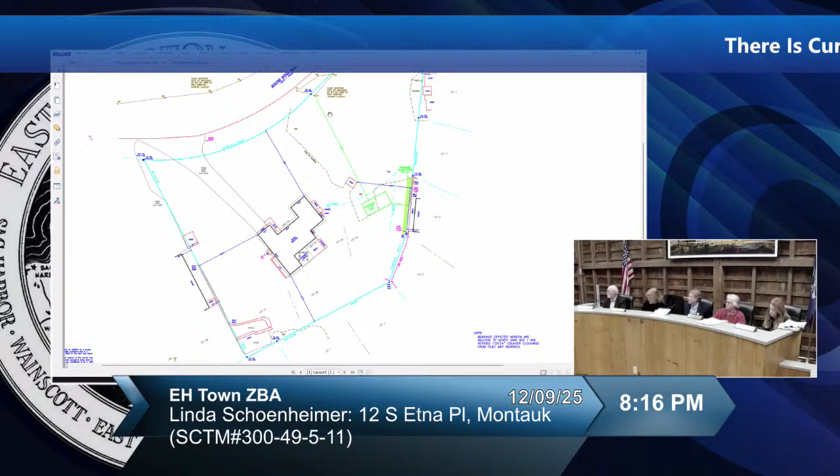So this is a small shed located 105 feet from wetlands up here to the north. There's also wetlands surrounding the property, and there's wetlands over here to the southwest.

A small amount of clearing is required, but that's privet, so we're not really too concerned with the clearing. They're doing a little bit of revegetation along the property line as well. It meets all the required setbacks. It's a very minimal project, and we don't really have any concern.

I don't have a problem with it. I'm good with this. Me too. I'm good. We have a motion.

Motion here. So for the application for Linda Schoenheimer, 12 South Etna Place, Montauk, tax map 300-49-5-11, make a motion to approve the application to be processed administratively.

Second. I concur. Concur. Concur. Thank you.

Next, we have post-hearing decisions. We have Montauk 007-668 LLC at 33 North Surfside Avenue in Montauk, Suffolk, tax map number 300-29-1-19.2.

Size and location is 19,105 square feet at 33 North Surfside Avenue, Surfside Estates, map part of lots 8, 9, 11, 12, and 13, block 356, map number 1690 in Montauk. Description is to legalize an existing home entrance, walkway, and driveway, install a new egress basement window, and allow for replacement of a new storage shed on a lot containing freshwater wetlands.

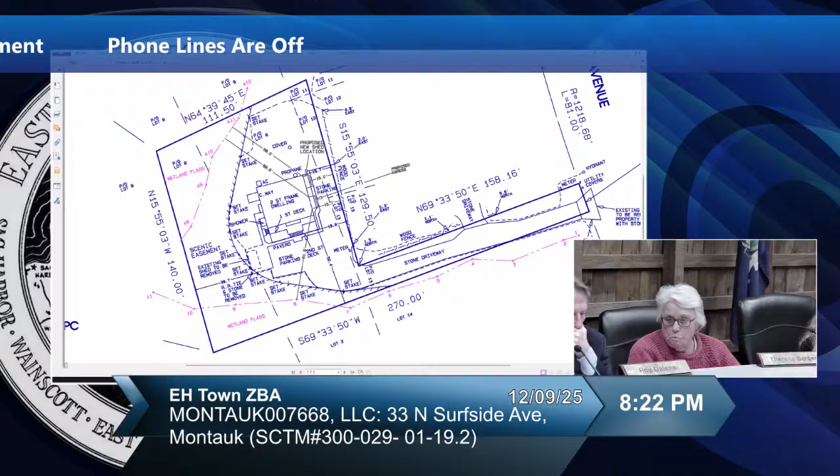Rick Whalen in his discussion did say that the apron, rather, they would remove it if we wanted them to, but he felt it probably protects some of the runoff from the gravel driveway to begin with. So I'm all in favor of giving the NRSP for that portion of the patio.

I think it meets the standards. I think there's no negative impact overall in the location of any of the improvements that are being required. And I think the minimum variances are being met on this and improve this project as a whole. Thank you, dimensional and NRSP standards.

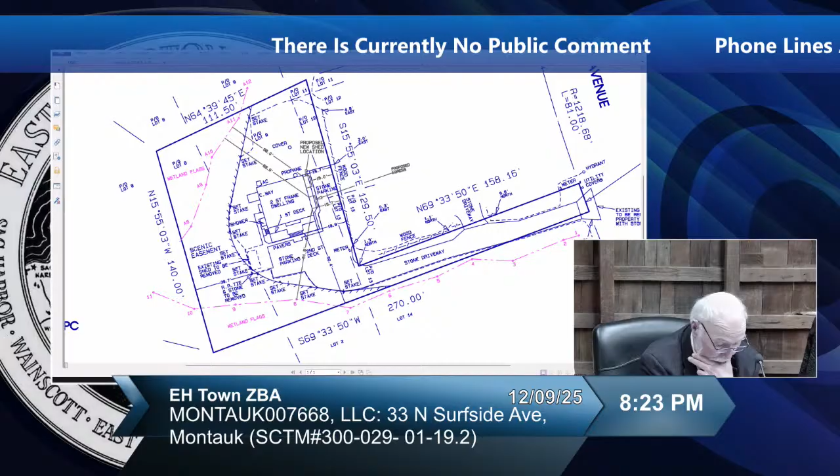Thank you, Ed. Yeah, there's not a lot to add. I think you're right about it. The egress window has a function there, and I think it was put in the best possible location. I think it's something that was reasonable for the applicant to ask for. I think we're moving a shed that's replacing a larger shed with a smaller shed up against the house, so it's in a previously disturbed area. We're going to revegetate where that shed was.

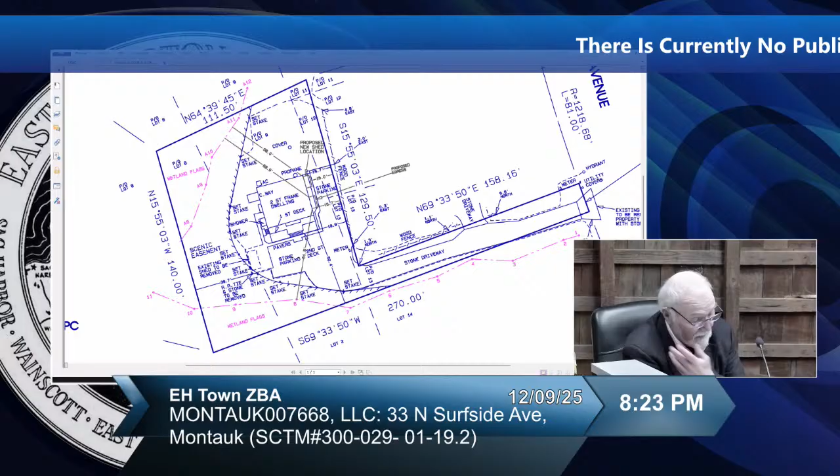I think that's a positive. I think the discussion of the apron, about a third of it was on the property of this parcel in question. I think taking it out has really no significant, but positive environmental significance. What's beyond it would have remained anyway - it was off the property. I think leaving it there is not in any way a problem for me. I think it does rise to the level of approving the NRSP. I think the variances are ones that are reasonable given what we were asked to approve. There's not a lot to add. I thought the presentation was a good one, and I think they tried to cover the bases. So I'm going to approve this application in its entirety.

Jane? Yes, I don't have a lot to add either. I'm approving the window egress variance. I think a window egress is appropriate and required for a finished basement.

It's balanced distance from both wetlands and likely the minimum variance necessary. And in no way do I see that an egress could be accomplished without a variance, and I don't see it creating any detriment to the neighbors or environmental conditions. I'm approving the shed for similar reasons - likely the best position possible. It's smaller than what was there, and it's out of the scenic easement.

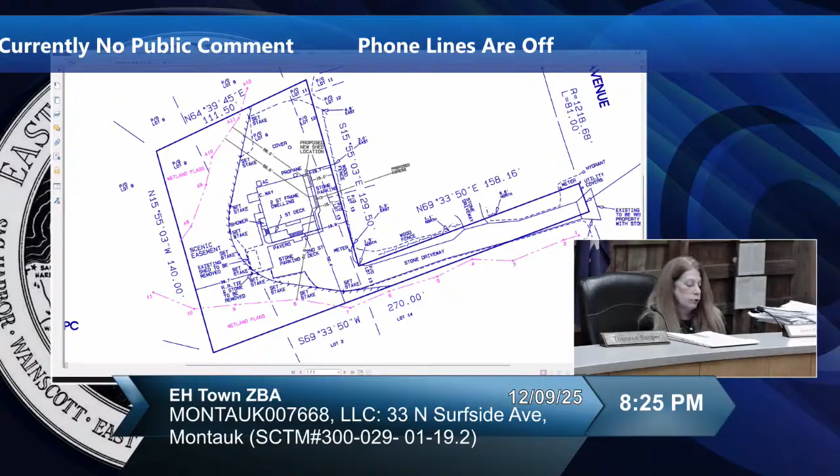There in the record, there was a BP memo sketch from the building department that also talks about us having to legalize everything that was in pink, which were all the walkways and everything. I guess we're legalizing that under the NRSP since they don't require variances. And I also agree that stuff does not create a detriment to the protected natural resources or anything else. On the apron, I don't know how they get the part of it outside of us approved. I guess they have to go to the highway department, but I'm fine saying it's okay to keep the brick apron that's on the property that's in our jurisdiction.

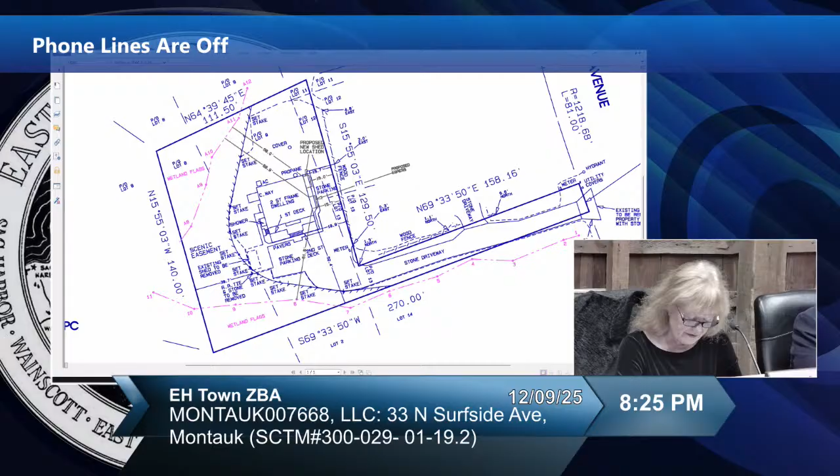Thank you, Vice Chair. I have not much to add as well. The project will not cause an undesirable change to the character of the neighborhood. Benefits cannot be sought by some other method other than a variance. 40% of this property is a scenic easement due to the property being constrained with wetlands. These variances are not substantial, and this will have no negative impact on the neighborhood or the environment. It is in keeping with the town's goals for protecting natural resources, and the natural resources will not be diminished in size, polluted, degraded, or put in peril.

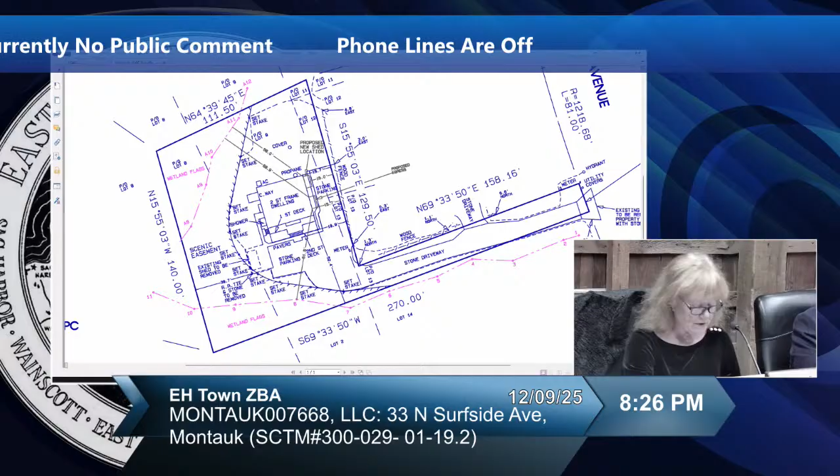Actually, the total lot coverage and building coverage have been reduced, so I'll be approving this application in its entirety. Thank you. I agree, I don't have anything else to add. One thing I forgot to mention - it came up that the lot size was off on the survey, and they will be submitting a new survey with the correct dimensions. Thank you.

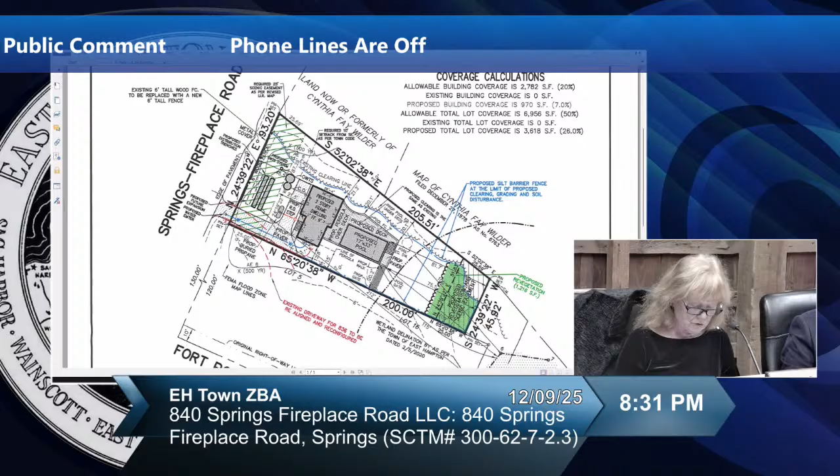I feel with the mitigation that's being proposed, the development is in keeping with NRSP standards, 255-551 and 255-540. I think this project is in keeping with the town's goals for protecting natural resources, and I'll be approving this application in its entirety.

Thank you. Ed? Yeah, thank you for that presentation, Vice Chair. I think they start by looking at this as an odd size—we know it's undersized, but an odd shaped lot.

And there was a real effort made here on the part of designing a structure, and the importance is to fit within the property successfully. I think it's important to note there are no variances requested here, just an NRSP. I think when you start out looking at how to develop a lot like this, this is a challenge.

This is a strange pie-shaped lot. They managed to propose a moderately sized home, 1,492 square feet. It does have a pool, it does have some deckage, but we see that it fit in very well.

I think the various requests—they were half of what's allowed in GFA, and the building coverage is 7%, where 20% would be allowed. These were all efforts on the part of the planning that showed that there was something into this.

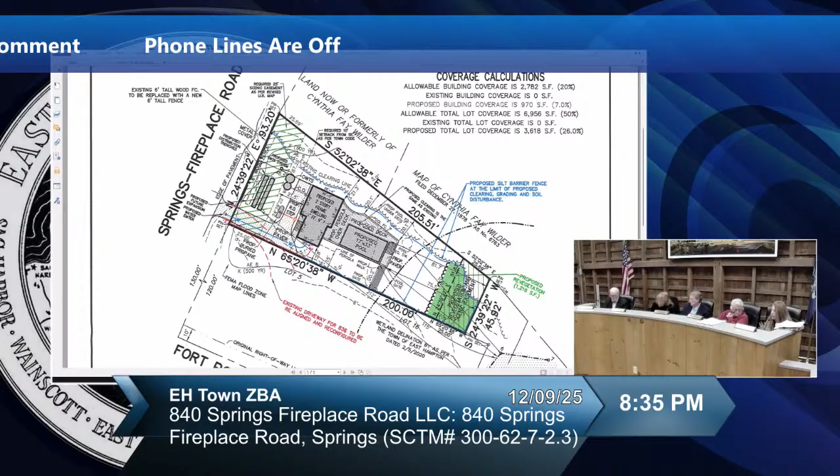Okay, so maybe while we're talking, you could put up the sketch that was shown to us, that would be helpful. Give me one second. Okay, so I won't repeat everything.

I also agree that this is an NRSP on a constrained lot, and all the proposed structures do not need variances. I believe what has been proposed, for the most part, does meet all the natural resources special permit standards, in terms of everything from character to not putting protected resources in—well, actually, let me take that one out for a second. But the house, the pool, and the decking seem like an appropriate level of development on the lot.

However, the planner was very compelled to make the case that the size of the scenic easement as proposed, which we saw in the survey and that two members have already discussed, was not necessarily enough at 25 feet deep, because it's HPOD and in an NRSP, and this is also the narrowest part of the lot closest to the wetlands. So it's not as much of a slam dunk for me without the extra variance, since it potentially puts the protected natural resource into some challenge.

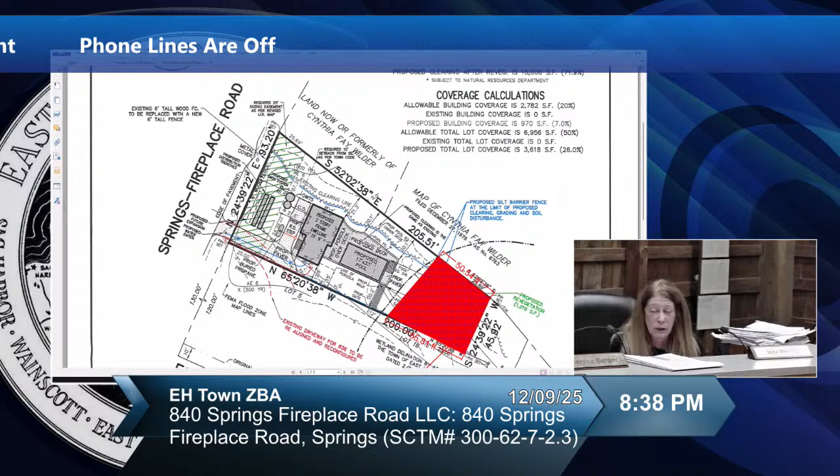Now, I did hear Ms. Bistrian say that she felt the additional 25 feet would be overreach, but she did say they would be willing to revegetate that extra 1,100 square feet, though they'd prefer to do that without having the easement extended over it. I still want to hear what my other board members say, but at a minimum, since that's offered, I believe that greater degree of vegetation closest to the wetlands could be viewed as more appropriate mitigation, even if it's not under an easement. So that's where I am, but I'm still a little cuspy on that extra bit of easement.

Thank you. Terry? Yeah, okay, I agree, actually, about the additional revegetation. As for the scenic easement shown here with the extra 25 feet, I know Bistrian made an argument that the planning board approved the scenic easements at 25% on each side, and that it would be a hardship to go back and change that. So I'm definitely against the additional 25 feet of the scenic easement.

But as Member Mehring said, Bistrian did say that she was willing to do an additional 1,100 feet of revegetation and keep this 25-foot scenic easement. She was willing to do that, which would reduce the clearing an additional 1,100 square feet. And I think we should go for that. I'm in favor of the additional revegetation.

Okay, thank you. I agree with the approval of this application regarding the revegetation and the easement. I find that the application is already meeting HPOD, which I think is laudable. I know that Morgan came to us, and it was kind of last minute too. It was kind of funny to me. So it was last minute she came up with this thing, but I don't think she identified the nexus for requiring more than what HPOD they were already meeting. So I too am going to approve the application as submitted.

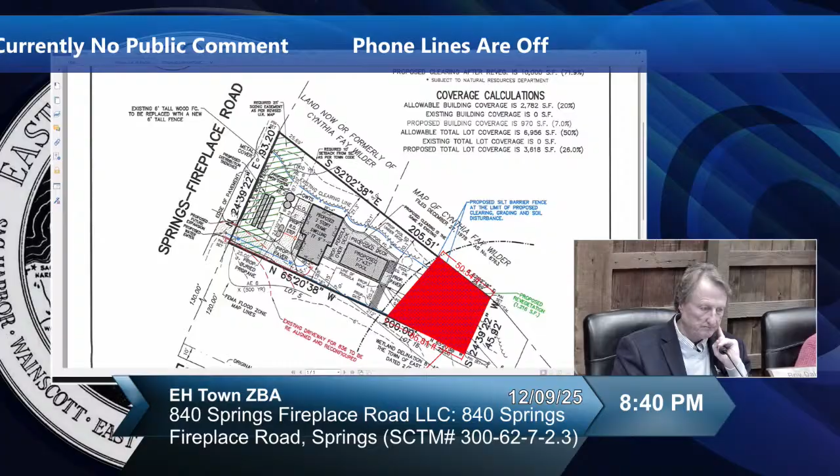Yep. Okay. So before you read the next hearing decision in, this is going to be Ocean Lane.

So at the time of the public hearing, I found no reason to recuse from the application. I affirmed that I had no conflict. Advice of counsel has long told me that proximity on this, or being on the same block, is not necessarily a requirement for recusal. However, in light of developments that took place during the public hearing, I find that now I need to step aside from the deliberation of this board, and I will be exiting the dais.

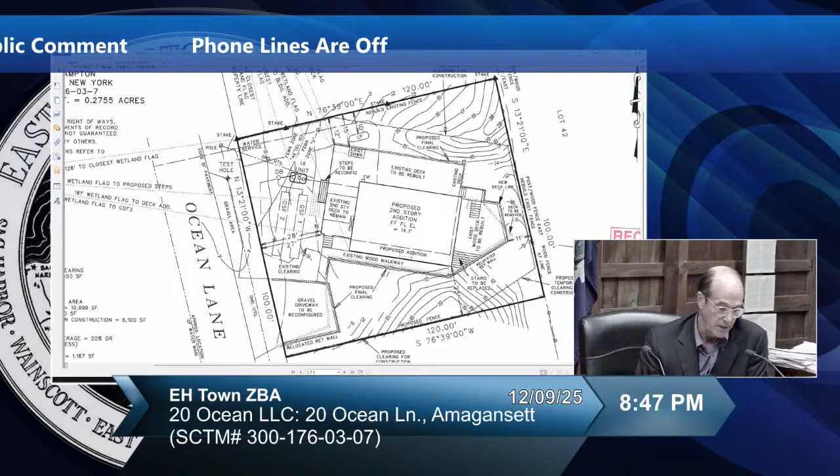I do not believe the variance request is substantial, and I don't believe that granting the variance will have an adverse effect or impact on the physical or environmental conditions in the neighborhood or in the affected area of the town. And though the difficulty causing the applicant to request an area variance is self-created, this consideration is not determinant.

So therefore, with the project mitigations as I stated previously, I vote to approve this application.

Thank you. Terry? Okay.

Generally, okay, I agree with my fellow board member. There are a number of things.

Well, I'll talk about the height one. The height one was actually easier for me to decide on. And as already stated, even though it's going to be a 4.25 increase in the height for the flat roof, it's going to be an ultimate lowering of about 4 feet from the gable roof that exists today.

And the additions, I think, will not be overwhelming. He's still well under coverage calculations for the property. Getting closer, but still meets that. So I'm definitely approving the variance for the flat roof.

And then the discussion of the retaining wall, the one that was in most disrepair, on the southwesterly side of it, they had the two options about doing the dead man approach and the concrete retaining wall approach. And I think everyone agreed in the TAM and board also that the best method was to go with the concrete retaining walls. So that is the one that I'm approving.

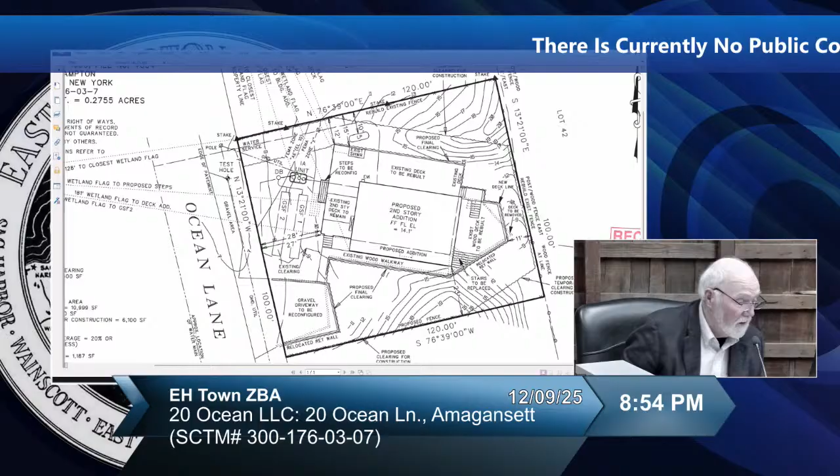I now agree with, having suggested it, I'm agreeing with the chair. It'd be one thing over a traditional septic system where we might have reinforced covers, and we've driven on them and over and done that.

As far as these leaching pools, I don't know that I'd want to be responsible for recommending anyone to put any kind of tonnage on that and find out we had done serious damage to it. I think the comment that we're not qualified probably applies. Someone else could have to make that comment to make it authoritative.

But overall, I think that there was a reasonable presentation. It seemed like the concern for the environment was on the applicant's mind. He represented himself so he could speak directly to how concerned he was about the future of the property. The revegetation is critical, and I think the comments that have been made about the fence to code in the future would be important. And then, of course, just that the planting plan being approved and then hopefully at the end inspected by the CFO so we see that the parcel is preserved.

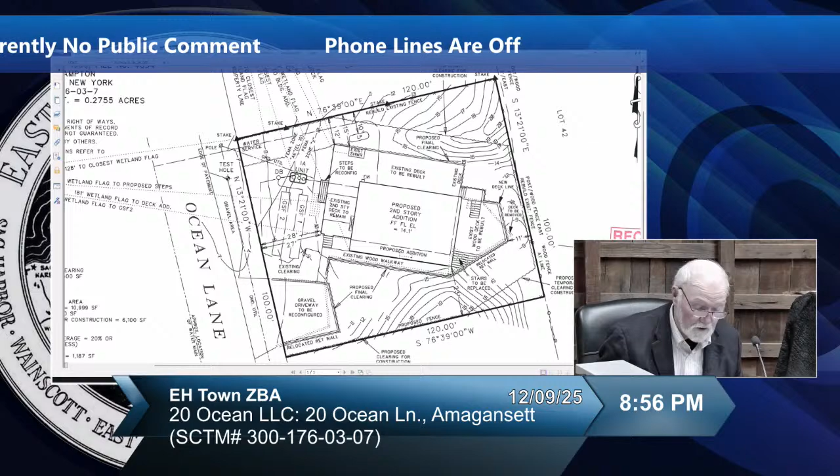With all of that in, though, I'm going to approve this application. I think that it was a reasonable effort made on the part of the applicant to address our major concerns, and so I have no problem with it, Mr. Chairman. Okay.

The only concern I really had on this is how the retaining wall was going to be installed. The dune land on this property is significant. The importance of this retaining wall is the fact that it supports and upholds the dune land characteristics, so not disrupting the existing topography is critical. The existing retaining wall actually holds up to approximately 10 feet of dune land topography and soils, so maintaining that dune land feature is paramount to protecting what characterizes this neighborhood.

The method of replacing the retaining wall by installing a new poured concrete wall appears to me to minimize the disturbance within the duneland habitat. This would avoid extensive excavation and reduce impacts to dune stability, native vegetation, and natural grade, while not really increasing the footprint. In my opinion, this approach may be considered a lower impact alternative.

There should be no disturbance other than what is absolutely necessary. What's important is that the restoration of vegetation after construction and, most important, erosion control measures should be implemented during construction, which will reduce impacts to dune vegetation and root systems. In terms of clearing, all the unimproved areas of the parcel should be revegetated with duneland species after construction. This will help to maintain the character of the neighborhood.

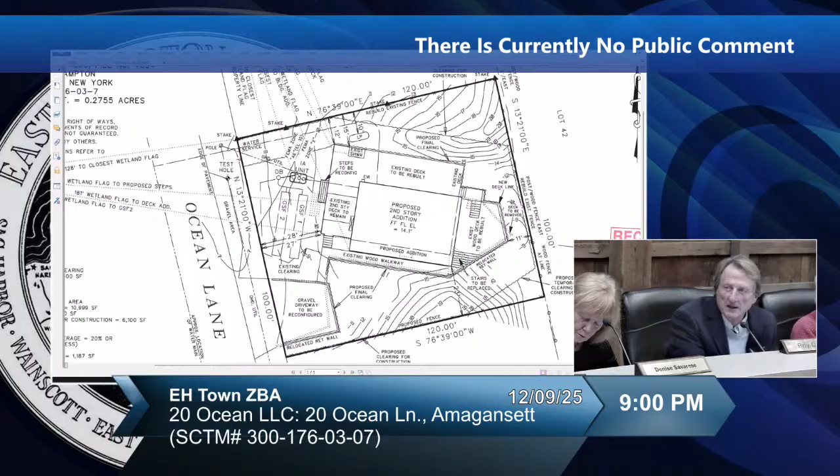Counsel, in paragraph D of the conditions, has to do with the revegetation plan. If we can say something to the effect that the revegetation plan shall be revised and submitted, showing that the final grades comply with the existing grades. Okay, so it'd be a re-veg plan and... yeah, it should be shown on the re-veg, like a grading and re-veg plan. Yeah, grading and re-veg plan shall show that the final grade contours shall comply with the existing. Okay, does that sound right?

That's a good recommendation, something to that effect. Big time, Lorraine. Okay, other than that, we're good.

Let's go back to the scenic easement and thank the vice chair for bringing that up. I do agree we should get a scenic easement on that as well. I know it stated that it would be small, but so what? The more protection, the better.

Is it recommended in there, in paragraph E? Scenic and conservation easement shall be established. Oh, it's actually already in the summary, 75 feet from the eastern property line. So it's in there, in the conditions. Yeah, and I think it's warranted.

Okay, you're good? Good job. So you said the scenic easement is where? It's part of paragraph E, in the conditions, in the recommended project. It's already in the summary of identified conditions. Oh, I don't have E.

This is in the TAM. In the TAM, yes, in the summary of mitigation, at the end of the conditions. It's one of the recommended mitigation measures.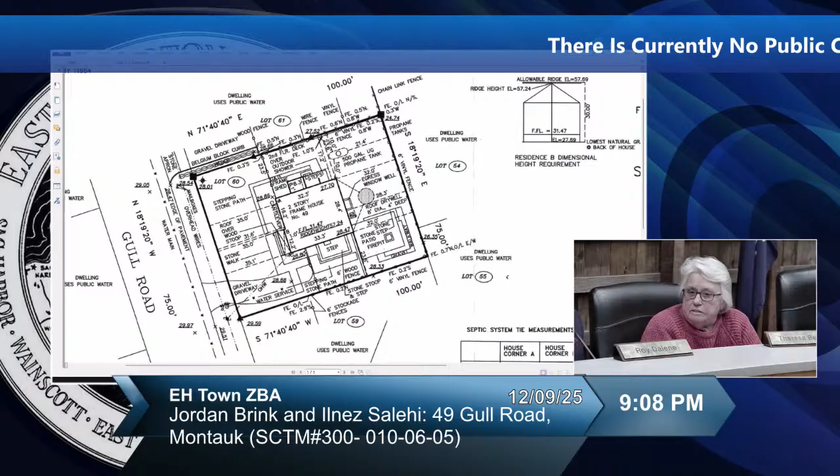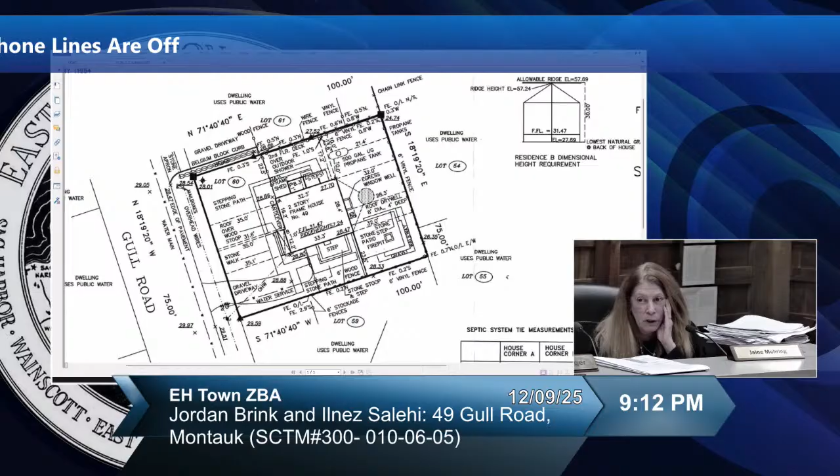And if it is based on a required 10-foot setback, those variances are a lot less substantial. Again, the unique factor for me here is how little of the patio is actually attached to how little of the house. Usually I think we think about these attached deckings or patios as kind of entirely attached to a full side of a house. So all in, not really substantial. There was a building department error, a builder's error, and I don't think from the standards perspective it will create much detriment to the neighbors or any issues with respect to character or anything else in the variance standards, so I'm going to approve them.

Who's going? My turn? Chair.

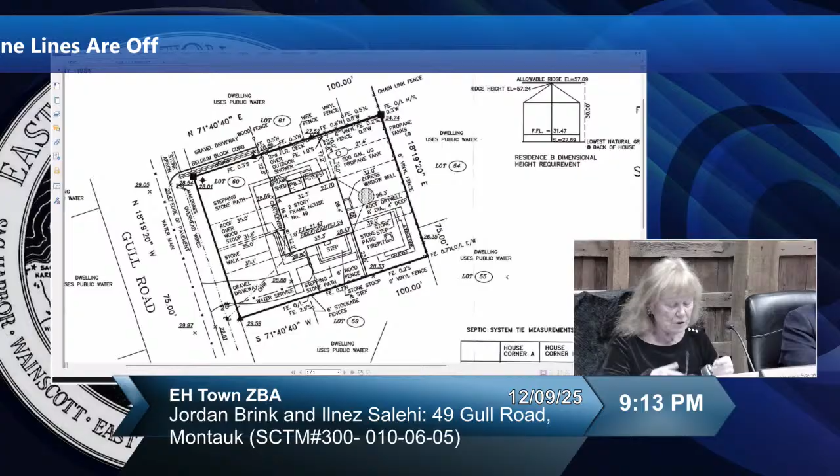I do not think that this project will create an undesirable change in the character of the neighborhood. This residence is actually surrounded by similarly sized properties. The project will not have an adverse effect or impact on the physical or environmental conditions in the neighborhood. As a matter of fact, the record does show that aerial photos and site drawings indicate very dense vegetative screening along the rear and side property lines, which should be maintained to help reduce visual or privacy impacts on neighbors. This area is not visible to any of the neighbors.

I will be approving this application in its entirety because I do feel it meets the variance standards outlined in 255-1110 of the town code to allow this patio to remain where it is. Thank you. I agree too. I have nothing else to add.

Next, we have Maria Cristina Pieretti at 501 Montauk Highway, East Hampton, Suffolk, tax map number 300-166-4-23. Size and location is 13,294 square feet at 501 Montauk Highway, East Hampton. Description is to allow a portion of an existing 334 square foot screen porch and a 146.45 square foot addition to the main house and 200 square foot addition to the cottage to remain within side and rear yard lot line setbacks and outside the town's pyramid regulations.

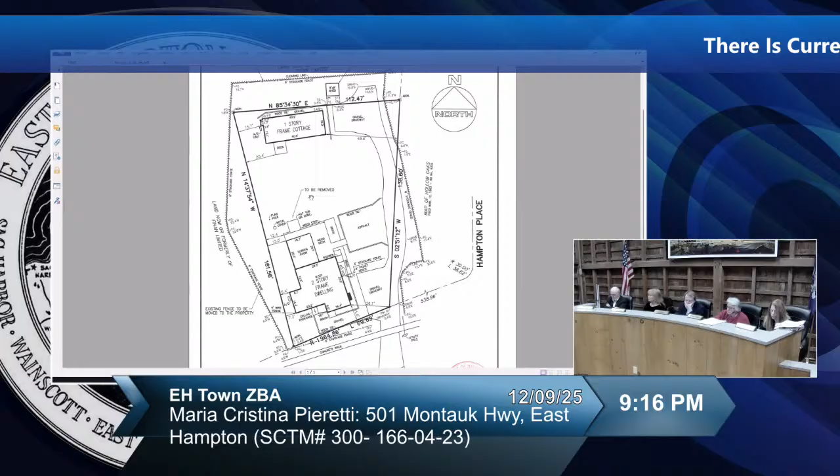Member Mehring. Thank you, Mr. Chairman. Okay, so the public hearing for this application was held on November 18th, 2025. I think we're working off of this latest survey dated 3/24/2025. The town was from AKRF. Ms. Karen Hoeg of Twomey Latham represented the applicant.

The property owner, Ms. Pieretti, spoke briefly on her own behalf. Architect Jonathan, and I didn't write down his last name, sorry, also provided some comments at the hearing. He also submitted into the record an architectural submission that shows the as-built structures and really highlights how much of each has an incursion and requires relief, which I found helpful and will be referring to in my comments. One neighbor also spoke very briefly, and she said she had no objections to the granting of the variances.

The lot is non-conforming, both in lot area size and also non-conforming in width. It is a very irregularly shaped lot, and this is a 13,294 square foot lot in an A residence zone. In particular, the front is the narrowest part of the lot, but both the front and the back are undersized to required widths. All structures, the house and the cottage, were erected prior to zoning and are pre-existing non-conforming to setbacks.

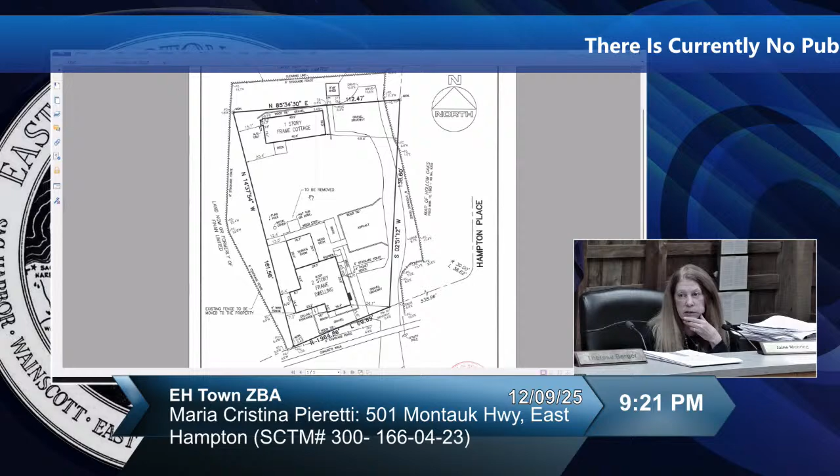On paper the variance reads quite large, however when you look at the architectural rendering, it's a very tiny slice of this room, screened porch, and deck that needs setback. Again, I think the benefit of allowing it to stay well offsets any detriment to neighbors or character or anything else. So I'll be approving the variances related to the wood deck and the screened room on top of it.

Finally, with respect to the cottage - this small cottage close to the rear of the property was already deeply non-conforming to setbacks. We don't even know exactly when it was built, probably been there for a long time. There was a 200 square foot addition on the east side of the cottage. Looking at the cottage now, it's very hard to detect that there was brand new anything really being created, in all of these additions.

We had the most robust discussion with the applicant on this, about this really expanding a nonconformity, which made me take pause. But again, this is a small, low-slung, one-bedroom residence that has its own CO, and only about a third of that 200 square feet is the portion that requires setback. So although it is expanding a nonconformity, I think there are enough unique issues around this property, around what's happened - and yes, the chairman said maybe it's buyer beware - but I am willing to approve this variance as well.

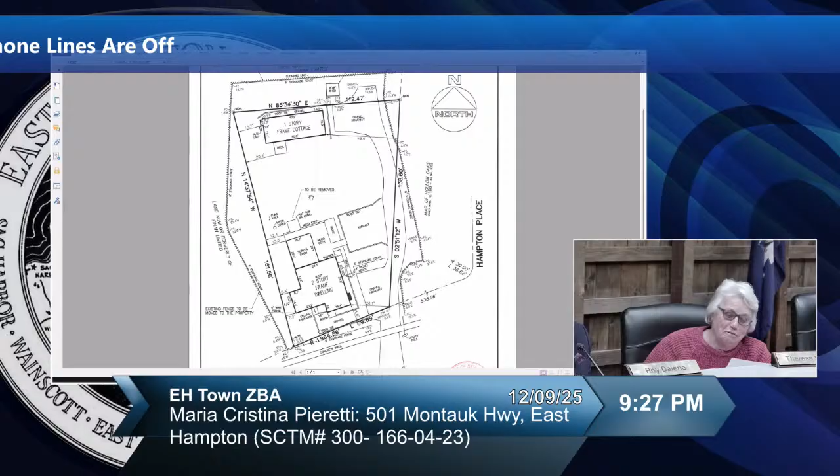No, very interesting—I'll say it's interesting, but I am approving the entire application. Thank you. Ed? Yeah, I want to thank Member Mehring for describing this as well as she did.

I think that each of these variances come with a story. And I think the big story here, we talk about uniqueness—I guess this is the most unique property we've seen with a fence. I don't know if I've seen anything quite like this. I agree with the argument that if you're buying a property, you should probably have legal representation that shows you where the real property line is. But if I'm walking on that property, I'm probably assuming I own a lot more than I do.

And I certainly wouldn't be thinking that these things that eventually became variance problems were going to be a problem. It looked like there was plenty of room behind that cottage. So that was their responsibility, and it was probably a legal responsibility of the representation to do a better job of informing them exactly what they were purchasing.

But I think Member Mehring's explanation of how these variances impact long-term both the community and the character of the neighborhood is a good one, and I think that largely they get reduced to not being terribly significant. The pre-existing condition and the fact that, as was mentioned previously, you don't see any new construction here—I actually looked at that cottage and thought perhaps they had added on to the west end of it and not the east end. So anyway, there's all of that.

I did go back and ask myself, under 255-850, whether the grant of the variance will cause an unwanted change of the character of the neighborhood—I say no. Whether the benefit sought by the applicant can be achieved by some method feasible to pursue other than the area variances—no. Whether the requested area variance is substantial—I think no.

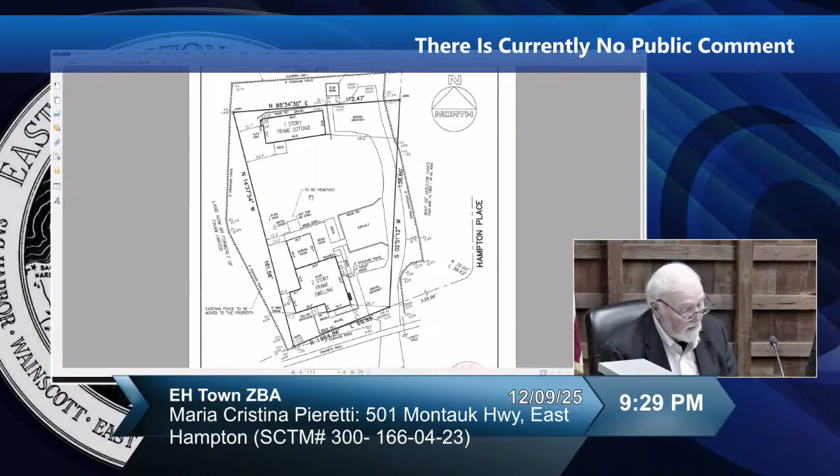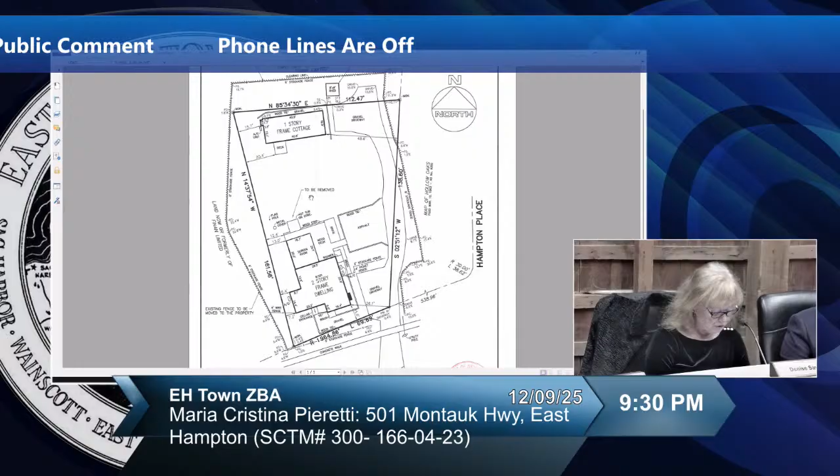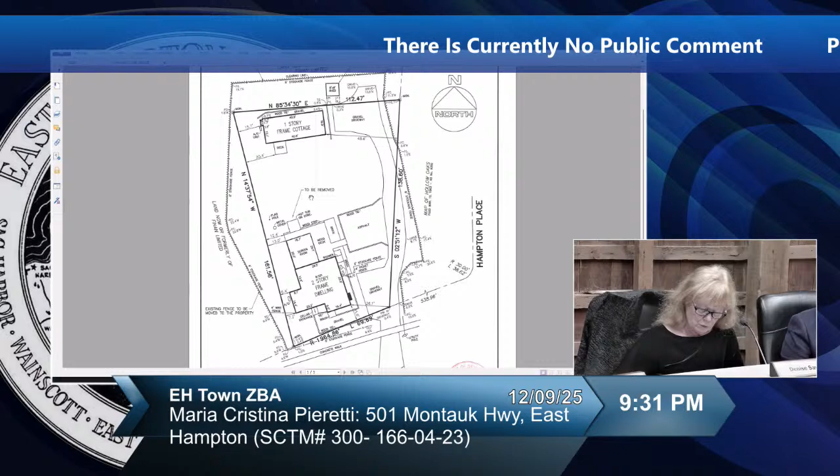The surrounding properties are undeveloped and wooded, and the property before us is notably undersized and small. The residence and cottage were constructed before the adoption of the zoning code, and the additions were constructed in 2016 without building permits. That work was not done by the current owner. This owner is simply trying to legalize what is there and CO the property. Additions were built in locations already disrupted by existing development. The hot tub and shed have been removed. What makes this unique is that it is pre-existing non-conforming and predates zoning regulations, other than the additions. These improvements have been in existence for quite some time, and legalizing the additions will not cause a detriment or impact on the environmental conditions of the neighborhood. The variances requested are the minimum necessary to reduce the described hardship that was inherited by the current owner. For all the reasons stated, I will be approving this application in its entirety.

I agree. I think the uniqueness of this thing is obvious - the guy mowing the lawn didn't know where the property line was. So I agree. I even think that Counsel Karen Hoag addressed the due diligence as it relates to buyer beware in a very logical way. I had to put myself in his shoes, and it would not have been as obvious. It was a good explanation. So with that, I agree with my fellow board members to approve the application.

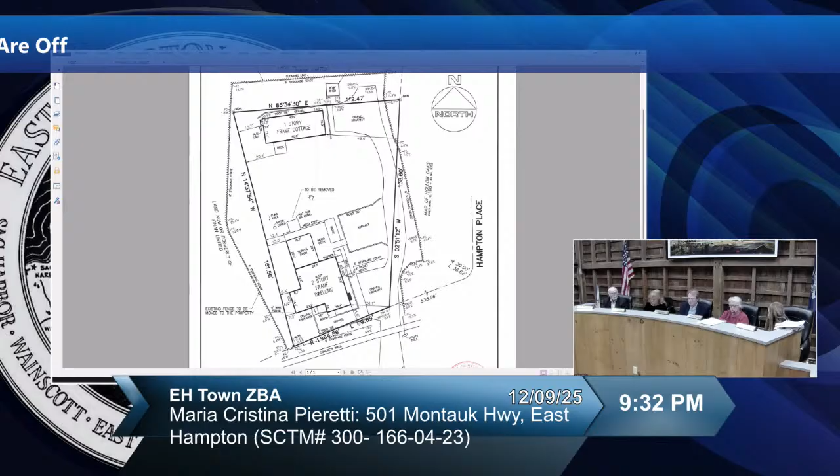Mr. Chairman, I was not here for the hearing for the next case, so I'll remove myself and allow. Thank you.

Do we need to say something about this EAF? We did. We did say it? We did a neg dec last time? Oh, we did, yeah, a neg dec on it already? We did. Oh, okay.

Next, we have 66 Montauk Highway LLC at 66 Old Montauk Highway, Amagansett, Suffolk Tax Map Number 300-172-2-27. The size and location is 46,654 square feet. The description is to allow the pool house to remain at 207 square feet and the shed to remain 7 feet above the pyramid line along the northern lot line. Relief sought is a variance of 255-11-10 of the East Hampton Town Code needed to allow the pool house to remain at 207 square feet, where 200 square feet is the maximum, and 255-11-72 for a pyramid variance of 7 feet to allow the shed to remain in place. Zoning district is a residence zone, X flood zone, and SEQRA classification Type II.

Member Meary: Thank you. Actually, I didn't see this go on the agenda until I walked into the room tonight because it went on late. So I'm not going to do a whole wind-up on all the things already in the record about the application, I'm just going to dig in, if that's okay. The hearing was held just last week. We had thought about making the decision last week, but I think we had a little technical difficulty and ran out of time.

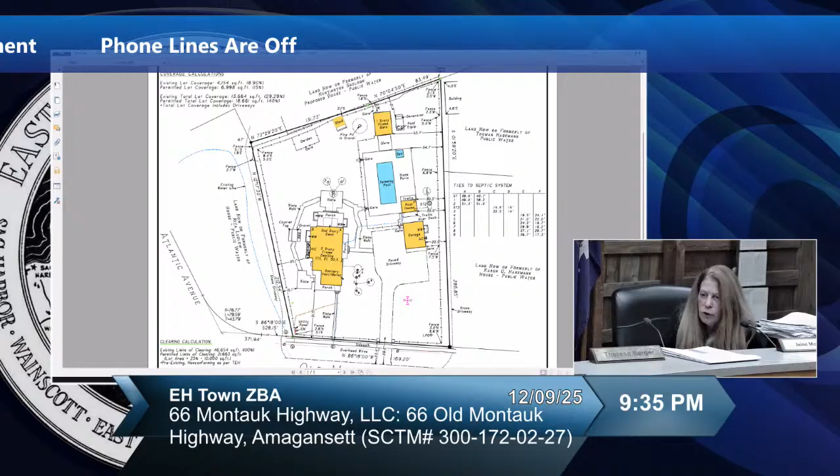Thank you. Terry? Okay, I didn't see it either. We're going to... okay. I'll only add that the agent was Joel Halsey.

Thank you. And I know in relation to the shed being so close, and the pyramid, he had a story about a tree that they wanted to save, I believe, and they couldn't just move the shed a little bit because they were concerned about the root system of that tree also. So consequently, for that reason, I will approve the shed variance, and on the pool house itself, as already stated, there was a mistake from a previous owner. It was on the C of O. I'm approving the 7-square-foot variance for the pool house also.

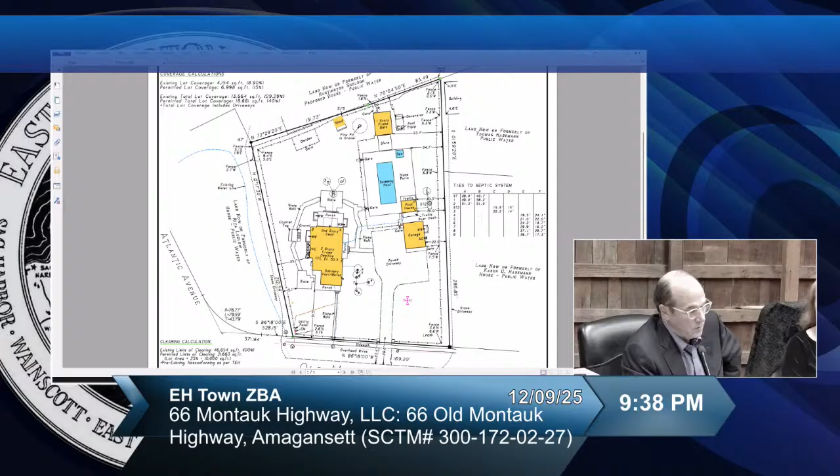The pool house variance of 7 square feet is a 3.5% variance. It's minimal. The pool house was built by the previous owner, and the overage appears to have resulted from a contractor error. Requiring the owner to remediate this minimal error would be onerous, and the benefit to the town minimal. The applicant is proposing to allow a shed that was grandfathered within pyramid setbacks. According to the plan submitted by the applicant, the original shed roof height was 5 feet 7¼ inches, with a new height adding 1 foot 4⅛ inches, bringing the total new height to 6 feet 11⅜ inches. The shed, which is only 2 feet 1 3/16 inch from the property line, is surrounded by vegetative screening. As the shed was moved further away from the property line, the new roof height nonconformity was reduced by 6 inches. Albeit that this change was made without the benefit of a building permit and is not to be condoned, I believe it is also minimal. I vote to approve this application in its entirety.

Vice Chair? I have nothing to add. This is a de minimis request. It will not change the character of the neighborhood. The application as requested will not cause any negative impact, so I believe it is in compliance with the East Hampton Town Code, and I will be approving it in its entirety. I agree with my board members. I have nothing else to add.